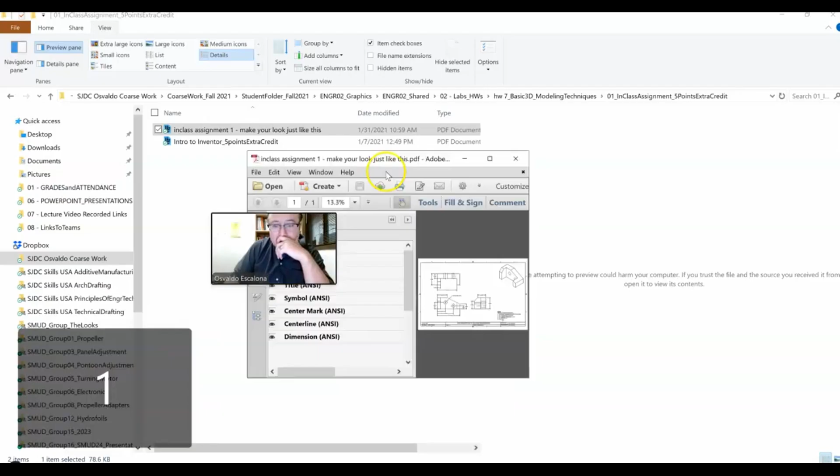So when you do it, try to make it look the same. I think the only difference is that you're going to have to put your own name. Besides that, try to make it look just like mine.

And again, if I mark it and you see that, and yours looks like that, then you have an excuse to tell me, Professor Escalona, you marked me for something that I did just like yours, and you shouldn't take away points from me. Most likely I will tell you it's fine, you got it.

This drawing is not perfect. It's actually made by Locke Jackson. It has a couple of mistakes. The first thing I notice here is that there is a little gap right there. Let me turn on my pointer, because I want to make sure you guys can see what I'm looking at.

Let's comment this. All right, so you'll notice there is a little space somewhere in there that shouldn't be there. That space should be here instead. This center line should be centered - there's a hole here, this represents a hidden line, which should be somewhere in the middle. It's a little bit offset.

Besides that, just make sure you put your name and the text is centered. And I think that's it.

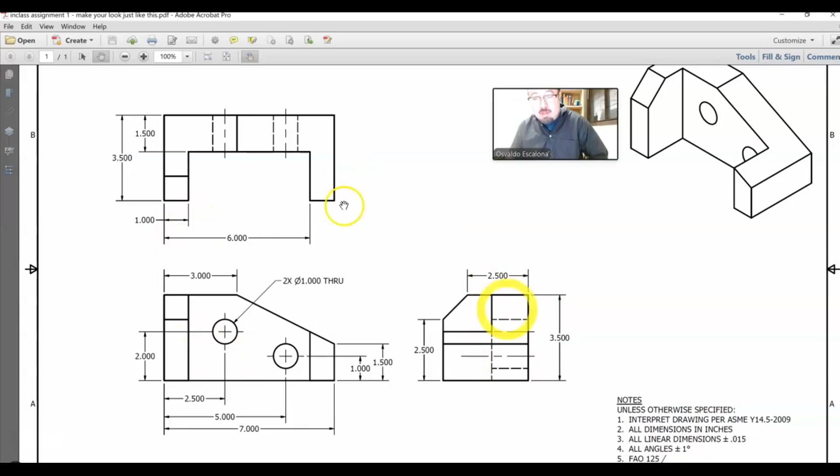Now, if you guys go and do it and it looks like this and I mark it, you can always argue, tell me, Professor Escalona, I made it like yours, and yours had whatever mistakes, I need my grades back. Now, if you don't make it like the one I'm giving you, then if I take away points, don't tell me why I didn't give you the 5 points, because you didn't make it like mine.

Especially at the beginning when you guys are learning, I want to give you as many examples as possible and have them correctly. Then you'll have homework number 7, which will also say make yours look just like mine. You need to make it like mine if you want full credit.

If you go to the lecture video recordings, you'll also notice that you have in-class 7 and homework 7. Again, the in-class 7 is extra credit, and the homework 7 is due on Monday.

Let's actually now talk about the new assignment, which is homework number 8. I have it open already. I'm going to bring up Inventor Professional, and let's talk about it. Let's actually read it together.

Use your own sketches and/or the dimensioned isometric views provided. Create a fully dimensioned A-size drawing. And you're like, okay, so what is an A-size drawing? A-size drawing is an 8.5 by 11, which I have a template for in my Dropbox, which we're going to use. 8.5 by 11.

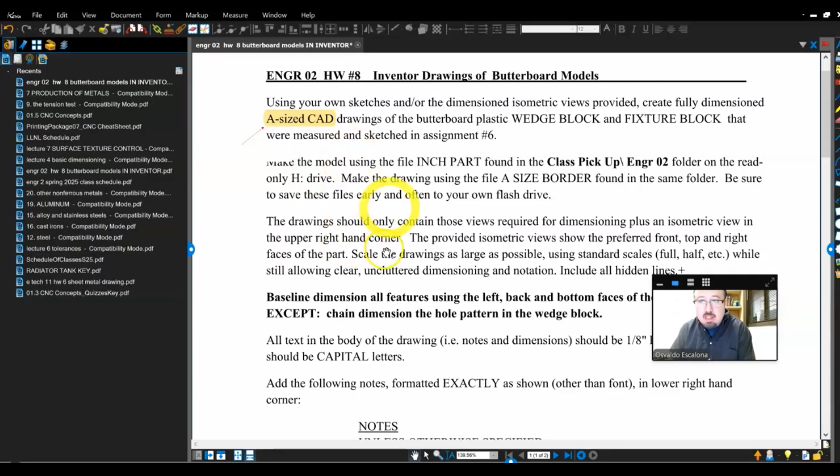The drawing of the butterboard plastic wedge block and fixture block that were measured and sketched in assignment number 6 - you guys are going to submit it tomorrow.

With correct dimensions. I'm going to do the models today. Make the model using the inch part found in the Class Pick Up engineering 2 folder. Okay, so this guy is not correct, right?

Because we're doing everything electronically, you guys will not find anything on the H drive. Everything is going to be in the Dropbox. If you go to your share folder, go to your homeworks, you guys recall there was the 00 border and model templates where you found your templates for CAD. Guess what? You also have the templates for Inventor.

So if you go inside, okay, this one's the metric one. Let's go back, we're doing inches. The US border and template, that is where you see the inch part, and that's where you see also the A size drawing.

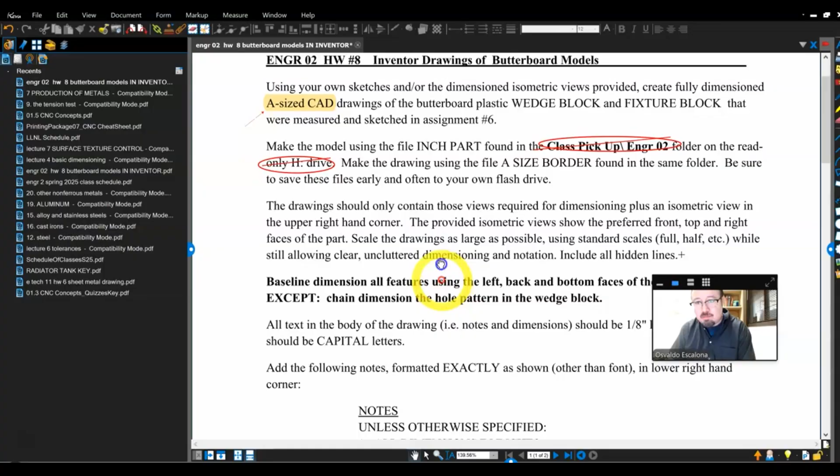Let's continue. Make the drawing using the file A size border found in the same folder. Make sure you save the files early and often to your flash drive. The drawing should only contain those views required for dimensioning plus an isometric view in the upper right hand corner.

The provided isometric views show the preferred front, top, and right faces of the part. Scale the drawings as large as possible using the standard scales like full, half, 3/4, and so on, while still allowing clear dimension and annotation, and notation include all hidden lines.

Baseline dimensions, all features using the left, the back, and the bottom faces. So datum, baseline.

Except chain dimension the hole pattern in the wedge block. Okay, so they want me to use a chain dimension for the wedge block.

All text in the body of the drawing should be 1/8 of an inch height, which is already included within the template, so you don't have to do anything. All text should be capital letters, yes, everywhere.

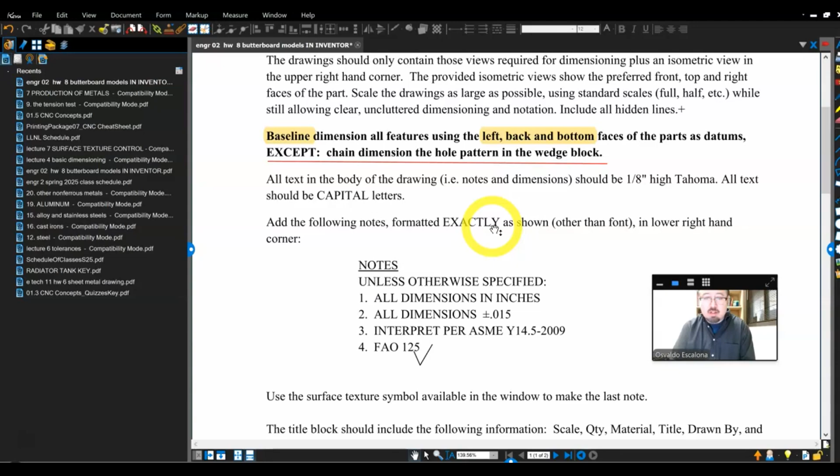Add the following notes, formatted exactly as shown in the lower right-hand corner. They want you to put the check mark, which is the surface symbol. And they also said that they want you to use the scale, the quantity, the material, the title, drawn by, and what part is required.

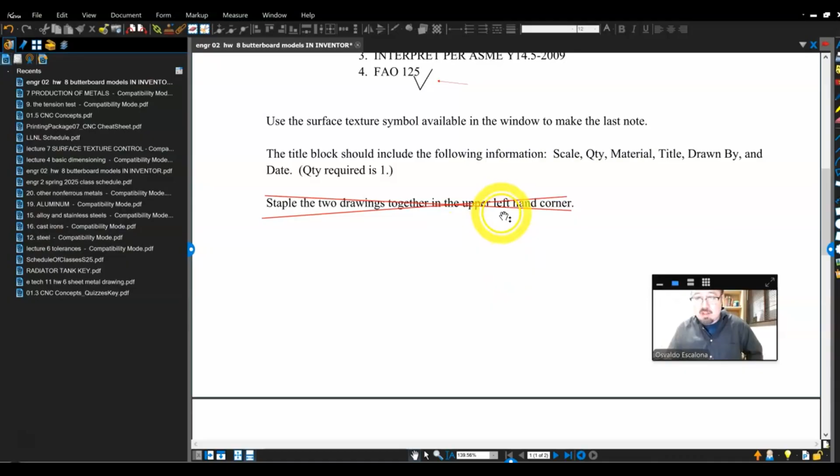Staple your drawings together in the upper left-hand corner. No, we are going to submit this online. I want to give you guys - everybody has different learning curves, so I want to give a chance to the people that need a little bit more time. That's why you guys are going to do it online, and I just want to give you guys enough time. Otherwise, you will have to submit this in person, and we'll be doing the same day. So I'm not trying to do that to you.

Okay, so let me, we're going to start with this one. Let me just register my mouse pointer focus right here. All right, give me a second, guys, and then we will start. I think it's good. All right, so Inventor should be open now.

It is right here. And again, the first thing that I want to do is I want to go get the files from Dropbox. Now, if you guys were to not install Dropbox, maybe you guys are - I believe I gave you guys a link in my drive.

Let me see, so I believe these links - don't quote me on this - I believe these links, if you go to my drive in the engineering lab, there is in my drive, it has one that says links. And you can grab this link for engineering 2 and post it in the drive.

Some of you guys have not installed Dropbox in your desktop or laptop, and when you do that, it's different working from the online version than working from the desktop. You guys will notice that I haven't installed my desktop, so I don't have to download anything. It's already there. But if you have not installed it, you have to do a little bit different. I'm just going to show you how to do it.

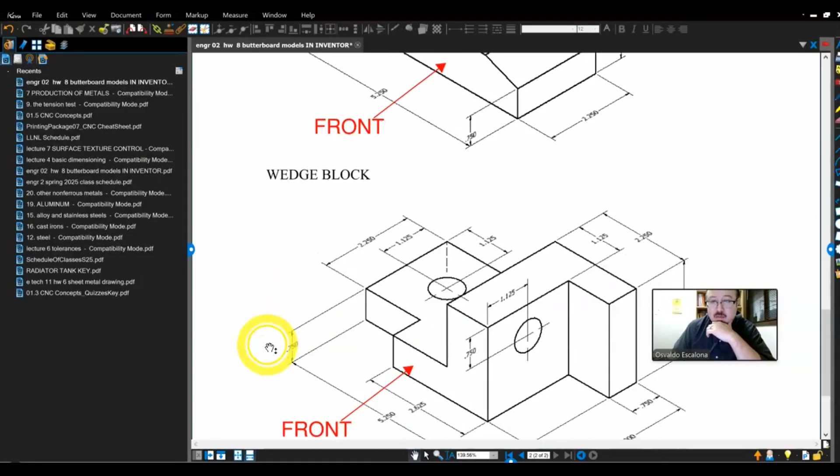As you remember, when you did your homework, you had two of them: the wedge block and the fixture block. So maybe, just maybe, I should have one model which is the fixture and one model that is the wedge block. So that's what I'm going to do.

I'm going to come over here and rename it wedge block part. Then I'm going to grab my drawing and rename it wedge block drawing, and that's going to be for the first one. And remember, I also have the fixture, so I'm going to select them and paste them. Control C for copy, Control V as in Victor for pasting.

So I'm going to call this guy fixture block, and I'm going to call the other one fixture drawing. What is that? Fixture block, fixture drawing, this should be part. I think I selected both when they got the same name, that should be the part. So just make sure you have a fixture block part, wedge block part, fixture block drawing, wedge block drawing, and you rename them before you even start, because otherwise it might lose the link between them, between the drawing and the part. So you want to rename them before you even open them.

So now that I have them, I'm going to open them. In fact, I'm going to open them from here. I'm going to say open. And you'll notice that it took me somewhere else.

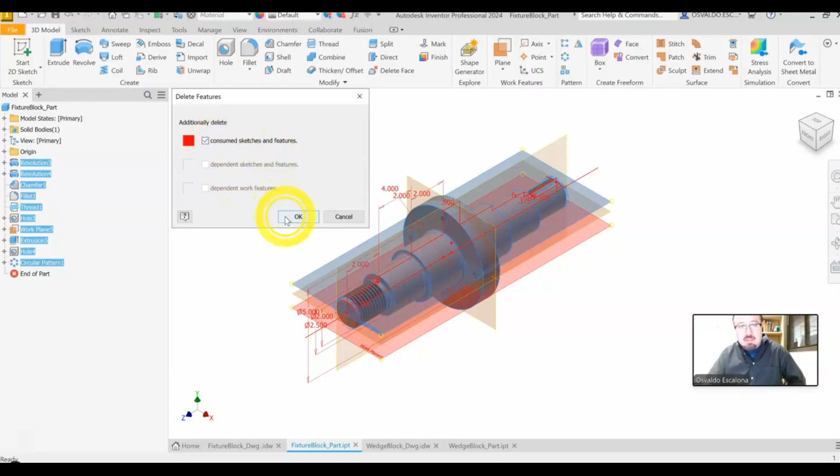It's asking you, delete everything, consume the sketches and features? Yes, delete everything, right? And save it because this is your template. Control S to save. I'm going to do the same thing: click the first one, shift, hold it, click the last one, right click, delete everything. Save it again because it's your template.

You'll notice that on my screen you have a yellow portion. I won't always be telling you, sometimes I might forget: red is the left button, the right click on the mouse is the blue button, and it will also point your menus. Usually left click is for selecting, right click is for menus. Inventor is really easy because everything is left click and right click.

The way Inventor works, especially on the easy models, is going to be subtractive modeling. I'm going to create a box. My box will look something like this. Boom, right? And then the same thing with your sketches, right? This guy says to me it's 5.25 by 2.25.

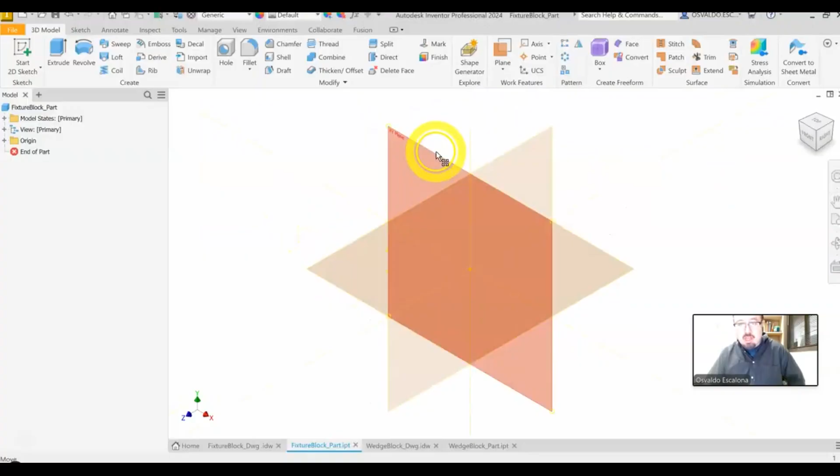Let's start. I want to select everything: left click, right click, new sketch. Then I'm going to go to the rectangle and choose the 2-point center rectangle. I'm going to hover until it becomes green, click on it once, and then click again somewhere outside.

You'll notice that my rectangle keeps on moving. It needs to be completely constrained. So I'm going to right click and give it a size. Right click, left click, I want to select the line. I click on it and type 5.25. Boom, it's going to grow accordingly by 5.25 and 2.25.

So I'm going to give it another dimension. Right click, dimension, and click 2.25. Boom, it has the size. I cannot move my block anymore. That's the whole idea: your sketches should be parametric and should be modeled correctly.

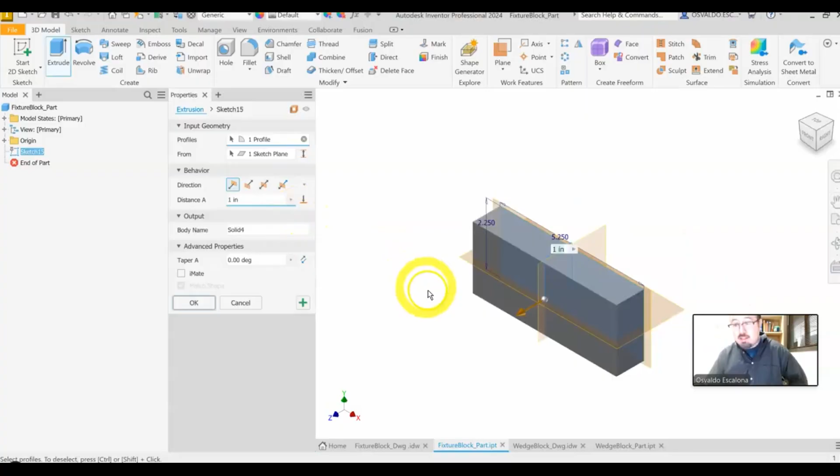So I'm going to finish my sketch, and then make it 3D. How do you make it 3D? By giving it the depth. My depth is 3 inches for my box. Right click, extrude. Inventor knows your most common commands, and extrusion is one of them.

So I'm going to go 2 ways, 2 directions, and I want it to go symmetrically. I can go one direction, I can go the opposite direction, I can go symmetrically, and I can also do asymmetrically with different distances in different directions. One extrudes this way, the other extrudes the other way. In my case, it was 3 inches. I'm going to click OK, and I want to do it symmetrically.

You can also give it a name to the solid. In my case, I'm not going to give it a name. As soon as I'm done, I will create a new folder, and that folder will be my solids folder. Now I'm going to start chopping the same way to show you how to dimension.

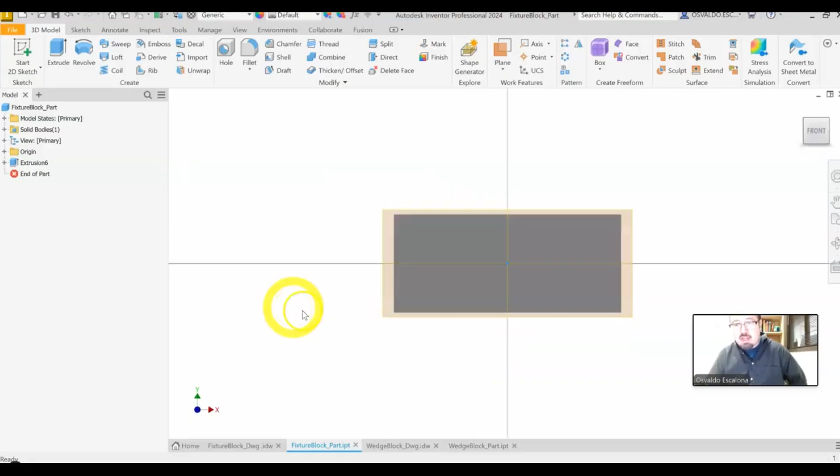I'm going to create on this face, and I'm going to create a new sketch. Remember, left click, right click, pretty much. I'm going to project a couple of lines, this edge and that edge. Then I'm going to right click and make a line. Left click, right click. Select on the line, select on the other line, right click, and say OK.

You'll notice that point is locked. But if for whatever reason, when you make the line, it did not lock, let's say you did something like this and it completely didn't lock. Once you did the projection, you can grab that dot and drag it till it snaps. And if it doesn't snap, continue dragging until it does. There is this command, the coincident constraint.

It allows you to put lines and points together. So if I click on it, I can click on the point and then click on the line. Boom, and then snap it. See, it doesn't come up anymore. If you want to delete something, select it and click the delete key on the keyboard.

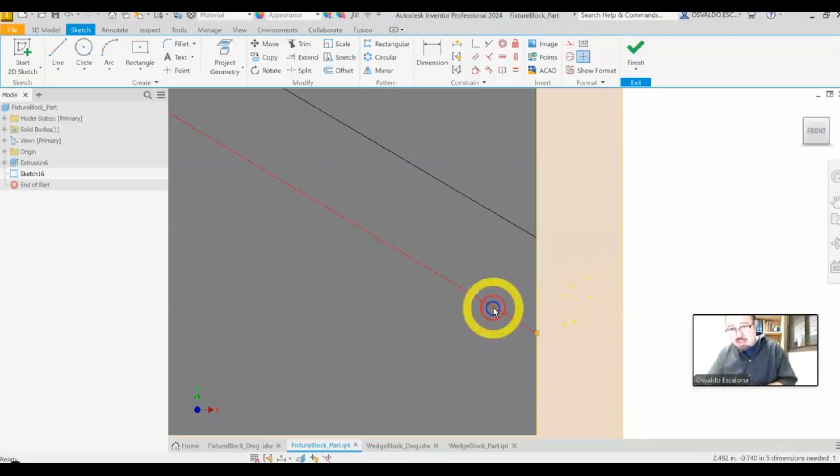What is the size of the cut? It's 1.5 by 0.75. I want to come over here, click on the left side, click on the point, and it's 1.5. Right click, dimension from the bottom to the point. Click 0.75. Boom, I have a closed profile because I did the projection of this line.

And in the projection of this line, I have a line, and a little triangle has been created. I can use it now to do my extrusion. Right click, extrude, select the triangle. I will want to create an extrusion in that direction, flip the side, and make sure that it is set to cut.

The first option creates the solid and joins it. The second cuts. The third creates the intersection between the solids, and creates a new solid. We're making a single part, so I don't need to create new solids, I just need to cut it. Boom.

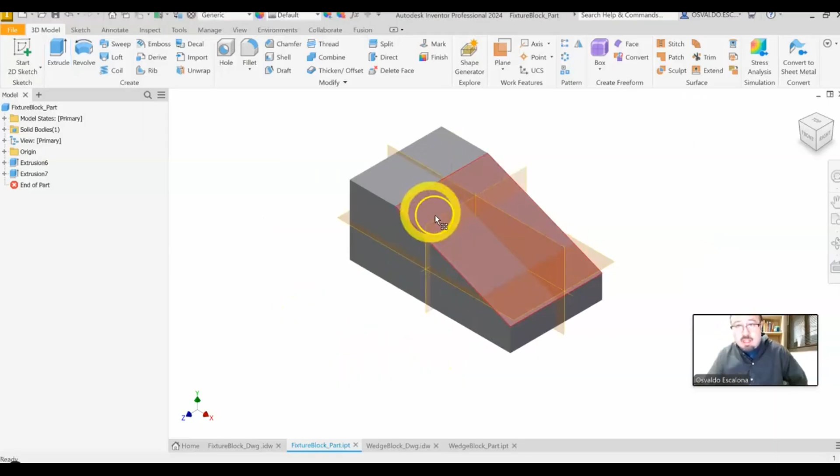I want to look at the things so you guys can see a little bit better. I can go to the View tab and set the display to shaded with edges, so you can see it slightly better.

Let's go back. Okay, so now I have another cut that I need to do. This is the cut that you guys need to do, right? So what I'm going to do is go to the side view and start doing a bunch of chops. Let's go to the side view, which is this way, right? So I'm going to select the face.

I'm going to right click and say new sketch. Left click, right click, left click, right click. So I'm going to do a rectangle. Left click, right click - so this is right click, by the way. Menus are right clicks. Click on it.

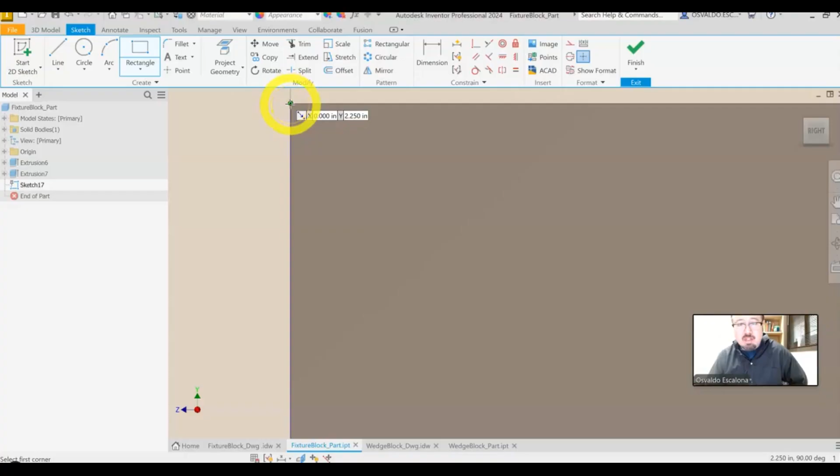Select the corner. Oh, I cannot get the corner. I see it right there. When it's on screen, it's ready. Click on it and then click somewhere outside. That's the first rectangle. Come over here, over till you see the dot, click on it, move away, and click again.

I got two notches that I gotta take care of. The first one is 1.5 and 1.125 from the bottom. So I'm gonna come over here, dimension, right click on this one, give it a 1.5, and the other is 1.125 from the bottom. Select the rectangle that we did, 1.125, boom, it's done.

I have another notch. This one is 0.75 and 0.75 from the top. So I'm gonna measure 0.75 on the side, and another 0.75 from the top - that's what it asks. 0.75, boom, boom, boom. 0.75, 0.75. I am done with both of the rectangles.

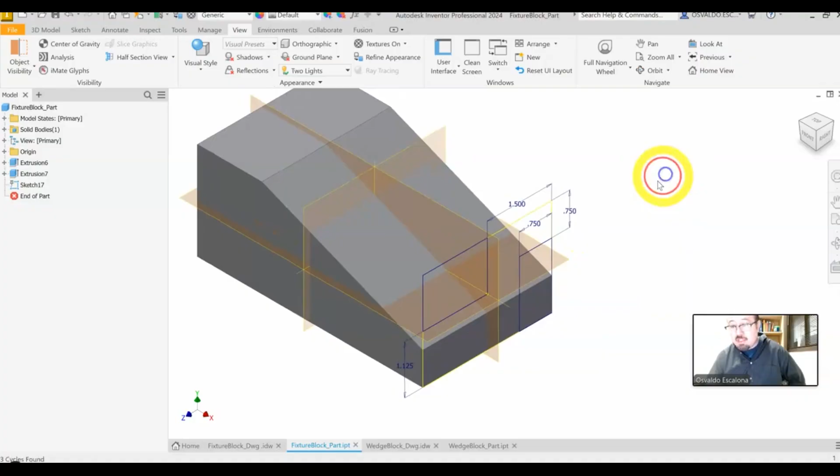I'm gonna finish my sketch. First rectangle in the front, second rectangle in the front. I'm gonna right click and do extrude. Select the inside of the rectangle, select the other inside of the rectangle.

I don't want it to add material, I want it to cut material, so I'm going to flip it. And I want it to go through the whole part. The first one has a distance, the second one gives it through all. The third one allows you to select a face to end, or something like a feature to end your extrusion. In my case, I'm just going to say through all. And my part is pretty much done.

I just need a couple of holes, hole 1, hole 2. The first one is 0.75 and 1.125. So how do you make a hole? Right click, hole, left click, right click, everything, right guys? Left click, right click, I'm going to click on the surface. Boom, created the hole and I need a 0.75, 1.125.

So I'm going to click on the edge to give it a distance and I'm going to type 0.75. I'm going to click on the other edge and I'm going to give it 1.125.

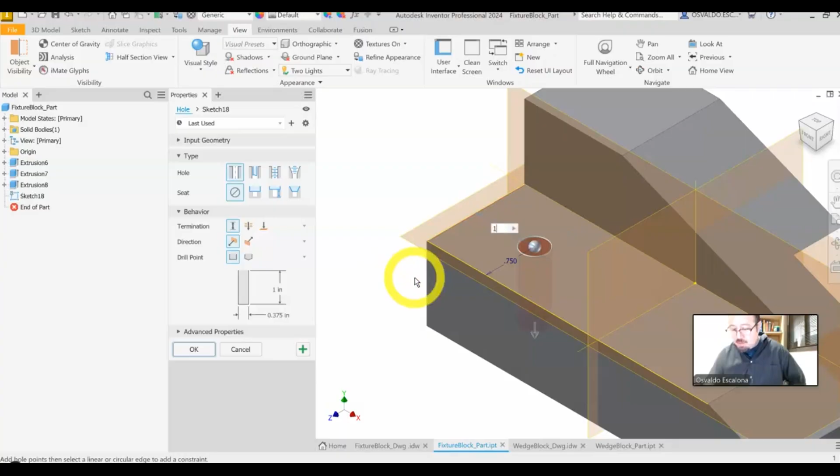Boom, I'm going to create another hole. I'm going to put it somewhere about here. And again, I'm going to give a distance from here, 0.75. From here, I'm going to go and find out what it is. So it's 1.125 plus 1.875. I'm going to type 1.125 plus 1.875. Boom, guess what?

Inventor can do math for you. Enter. What happened? I didn't look at the holes. What was the size? I need to edit the command.

Anytime that you want to edit the command, there's two ways of doing it. You double click on the command, it will open the command again, or you can click on it and then right click on it and then edit the feature.

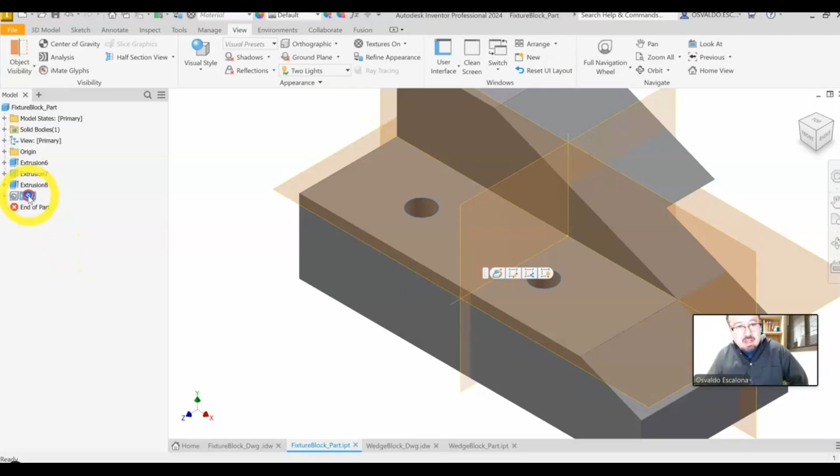When I created my hole, it actually created a sketch. You guys notice the sketch? The same way that we did with the extrusion, the hole command automatically does it for you. If for whatever reason you made a mistake, you don't have to repeat the whole thing. You can open the folder, click on the sketch, and change your dimensions.

Just click on it and give it a new dimension. I don't know, 1. Boom. It will move it. Control Z, as in zebra, to undo what you did. I needed to change the hole size, so I'm going to double click on the hole.

And the size of the hole is 3/4 of an inch. So I'm going to come over here and type 0.75. Boom, simple hole. There is no seat.

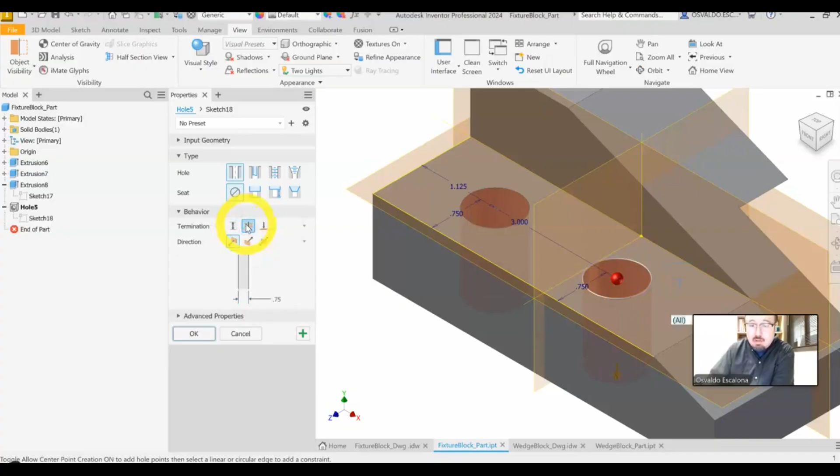I don't have any spotfaces, any counterbores, any countersinks. The termination is going to go through all. I want it to go through the whole thing. I can change the direction of the holes in case we need the right direction. I'm going to say OK.

At this point, if I want to get rid of my planes, I can go to view and object visibility, and turn off the work features. If I want to give it a nice color, I could come to the default colors. If I want to give it a material, I go to the generic material.

Let's make it out of particleboard. Let's say that this guy's ABS plastic. Boom! How do you do it?

Now it is time for me to do a drawing. When you make your models, they should be clean. Extrusion use, extrusion use, extrusion use. There should be no extra sketches all over the place. If you create sketches just like crazy, your functions and commands will not work. You will start looking for different things and you won't know what to do. Create a sketch, use it. Create a sketch, use it.

There is a command line. The command line tells you where the part started and how it was built. I can drag my command line and it will tell me how it was built. I created a cube, then I created a cut, then I created 2 cuts, and then finally created a hole. We'll dig more into the command line later on.

This is officially your first modeling video. Let's start placing this in the drawing.

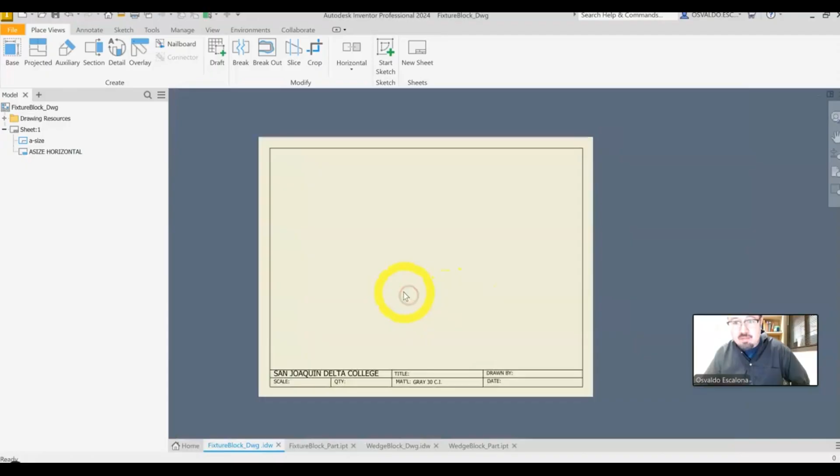All you have to do is click on the drawing. You guys should have it activated, and then once you place a view, it's just left click, right click, and base view. That's the front view. If you create it correctly, that is the side view, that is the top view, that is the isometric view.

Boom! Created the views for you. You don't have to do anything. You just gotta drag them and put them in the correct location. Seems to me that a half was pretty good, which I believe that's what we're gonna use.

I need to put a bunch of center marks, center lines. I'm gonna see if Inventor can do a couple of them for me. I'm gonna hover until I see the perimeter of the model. I'm gonna double click, it's gonna bring this. I don't want that. Actually, I'm just gonna click on it once, right click.

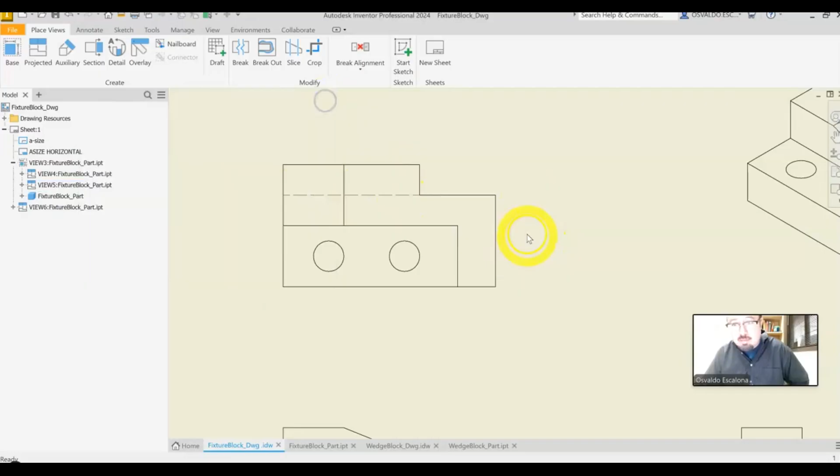There should be one that says automatic center lines. Click on it, activate it, and say okay. Boom, created your center lines.

If for whatever reason they did not create your center lines, there is always a way to do it. You can go to the Annotate tab. There is a center mark right there. Click on the hole, boom. This is a hole pattern.

I need to create a center line in between them. That's what this one comes about. I select the hole, I select the other hole, I right click and I say create. Boom. Let's try it again.

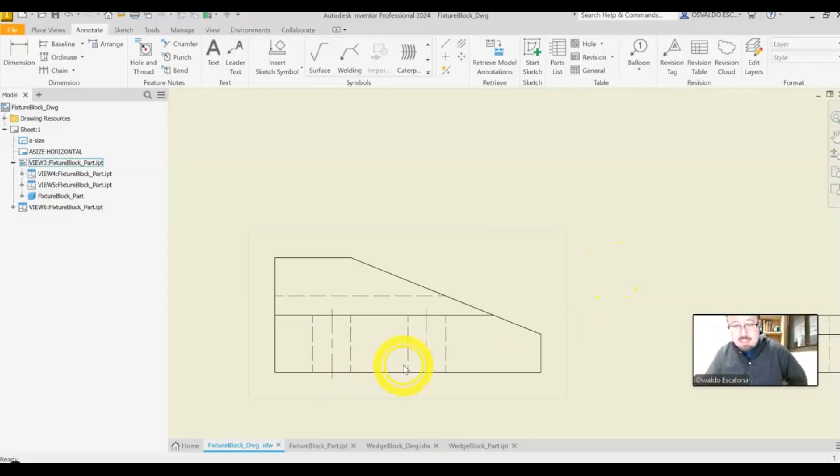I'm gonna click on my view. Right click, center line, automatic center lines. Click on that one too, and click OK. Boom. If for whatever reason it did not create a center line, delete. Let me delete that one. Select delete.

There is this one, it's called the center line bisector. It allows you to create a center line between lines. So I'm going to select this line, and then I'm going to select that line, and boom, that's it for you. Let's try one more time.

Left click, right click, automatic center lines. Click on that guy, and boom, done.

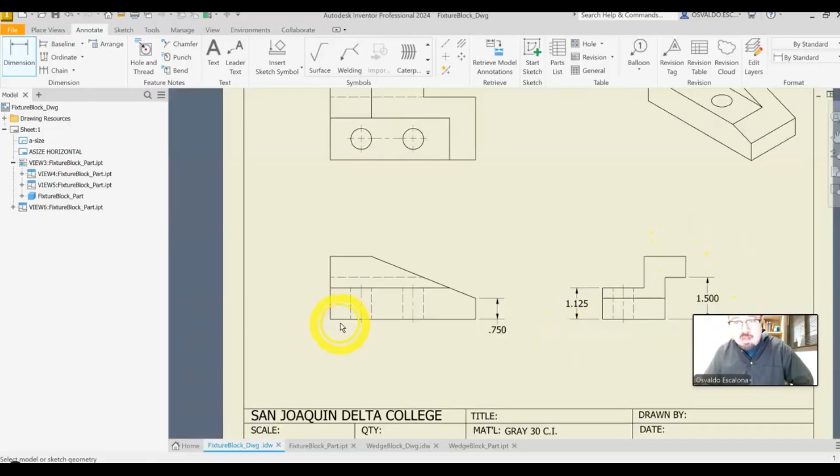Now you guys gotta put your dimensions. How do you put dimensions? You right click, dimension, from here to there, boom, from here to there, boom, from here to there, boom, overall height from here to there, boom.

When you create a vertical dimension, if it doesn't fit, there should be a little shoulder. So click on the dimension, select it, hold on it, and then drag it. There should be a little shoulder if it did not fit.

The left, that's the bottom datum. The left datum, left click, right click, or right click, left click in this case. Because I right click for the menu, left click to select it. I'm gonna do the holes.

Again, one of my features from here to there. Boom. They told me make a chain dimension between the holes. This is a chain dimension. They need to be chained with each other.

Keep in mind that I'm giving them a space in between my part and my dimensions. Should be within about 3/8 of an inch. You don't need to measure it. Just make sure that your spacing is not too close to the part.

I'm gonna go from here to there. Boom. The next one, this one, I don't need it. I never went over here to from the back and figured this out. I just did the angle, went to the side, boom, created my 2 notches, and this guy was derived from it.

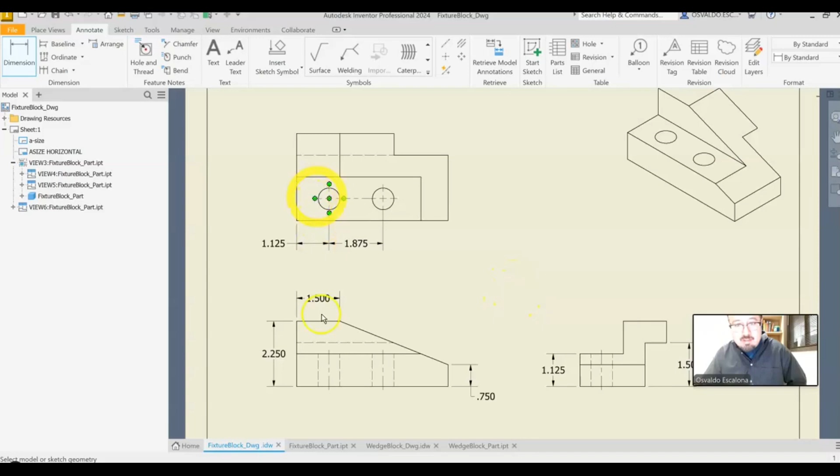I never had to actually dimension this line. So I got the first feature, second feature, the next hole, and it seems to be the last thing is just the size of the part. I'm gonna put it right here. Boom. That is the left datum.

I'm gonna go to the right datum. I mean the back of the part, which is this is the back, and that one is back. So in my case, I could have preferably come over here and do it here. Oops, not there. Right click dimension. Preferably do it here because that's what I did the notch, right? But unluckily, things are crossing each other.

So instead of doing that, I'm gonna put it on the other view. Again, preferably it should be here, but I don't like to cross things. So I'm gonna go put it over here. That way I don't have to cross them, which is the same feature, right?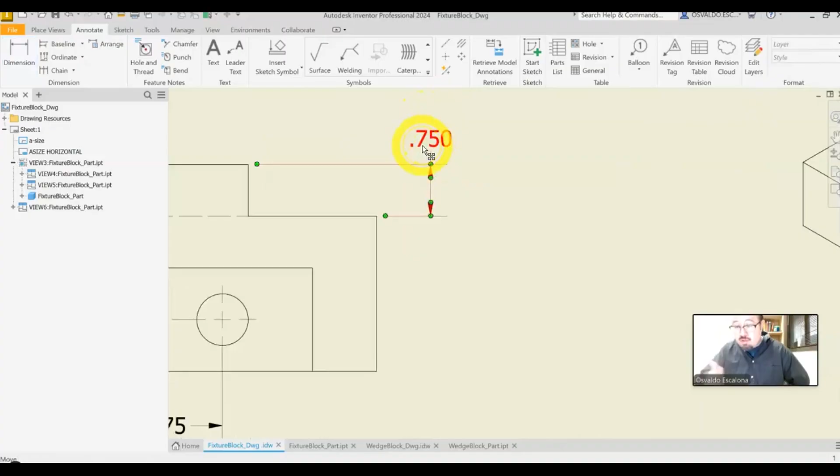Remember, if your part get out and you're doing a dimension that is sideways, your dimension is going to look like that. You always need to have a little shoulder. Boom. Okay, so that is that one.

The next thing is this one. That'll make sure it aligns next to the other guy, right? Kind of similar to alignment. And then, so I did this one, I did that one.

The last thing will be overall width. I'm not going to do it here because it's going to cross this dimension. I'm going to do it over here. Oh, I also got a hole. The hole right there. And then I got the dimension from the whole part.

So let's worry about that. Boom. I also have a hole right there. Keep in mind that there is no spacing here.

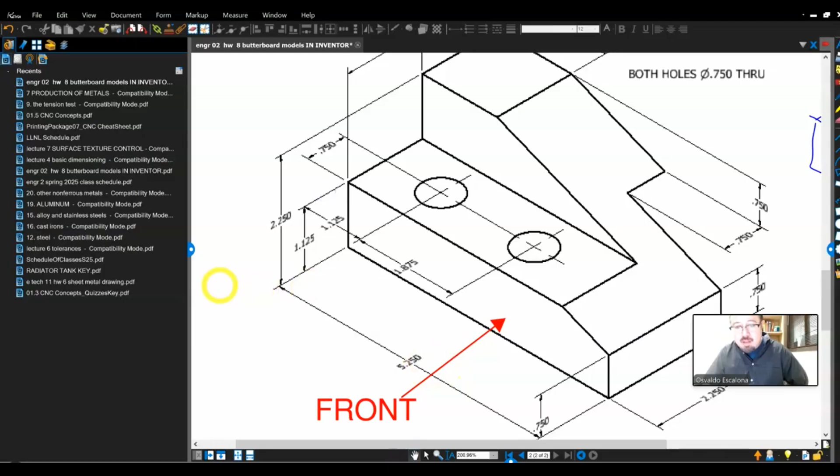We need to call out the holes, and there's a nice command called hole and thread note. It calls out the hole for you. All you have to do is select it, click on the hole, move away, and boom, it will do it for you, and give it a diameter symbol.

All you have to know now is on the front of the part, and we've got two holes. So I'm gonna say with an uppercase letter, 2X. I'm gonna say okay, boom, done. Literally, I think we're done with this part.

The next thing you guys want to do is put your name, you gotta put the title block, the name. You also need some notes. How do you create notes? This is the note maker.

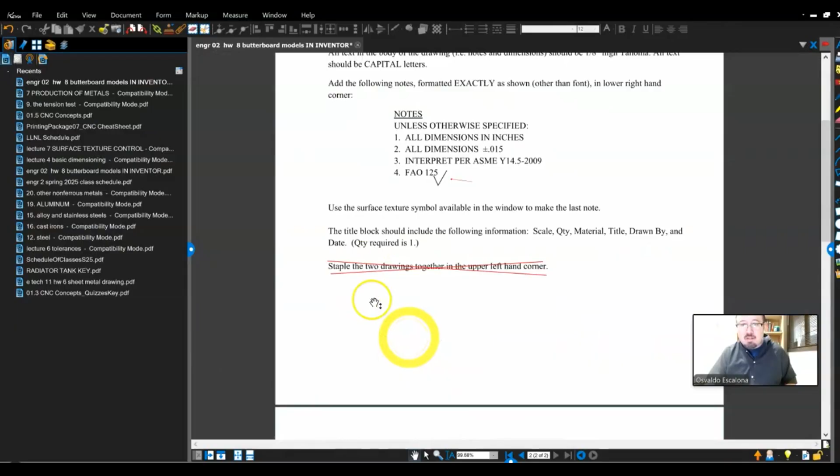I'm gonna put a big old note like this. It will take it to the editor. In my case, I remember I saw the notes somewhere, here, I saw the notes. Let's see if I can select them, select text, see if I can do it that way so I don't have to type it. I'm gonna select it, I'm gonna put it, boom. In you guys' case, you're gonna have to type it, right?

But if you want to put symbols, the symbols are where they are, these are the symbols. You select the symbols, plus and minus. If you want a degree, that's the degree, the countersink, spot face, and so forth. Okay, unluckily, we don't have a surface finish symbol. There is no surface finish symbol anywhere, right?

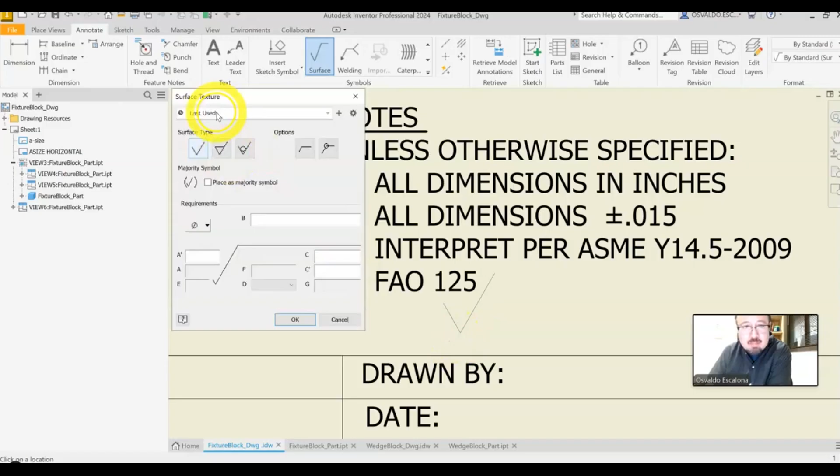So the way you do the surface finish symbol, until we go and underline this, right? The way you do it, remove my views slightly, it's a little out of the way. You go to the annotate tab, there is symbols, click on it, and then click again, double click real quick, it'll open this menu and you just say okay, escape. You'll also do a couple of texts for your title block, and boom, this part is done.

You need to create a PDF when you're done, so that I can grade it. To create a PDF, you go to the top, there should be a file. You click on the file, then go to export, and click on PDF export. Click on it, boom, it will ask where you want to save it, so you click on save, click OK, and it will generate the PDF.

You can now take a look at it. Let me see, it is here, it's the PDF. So in this case, I'm done with the fixture block. We just did it, right? That's what you're going to submit after you save it, and after you put the information on the title block, with a bunch of text notes. Boom, that's pretty much it, guys.

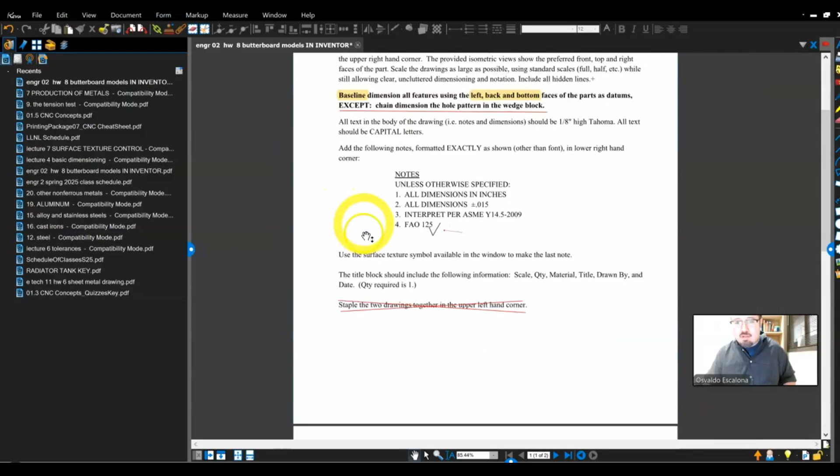You're going to do the same concept for your other part. What's your other part? I did this one, you guys get to do this one, right? Homework number 7, let's take a look at homework number 7. We have a couple of minutes, good enough for homework purposes.

Homework number 7. Remember, Autodesk Inventor is really friendly, so friendly that it allows you to do everything with left click and right click. Okay, so this is your part, right? So again, if you guys were to do this, most likely you will start the same way. You start with a rectangle, or not a rectangle, a cube, not a cube, but like a rectangular prism.

You guys will make a triangle, right? The same way that I did it, cut the notch, then make another square right here on the bottom rectangle, and then make two profiles with extrusion, boom. That will take care of this and take care of that. Then go to the right side view, make another rectangle, and boom, cut it, right? That will create all these notches.

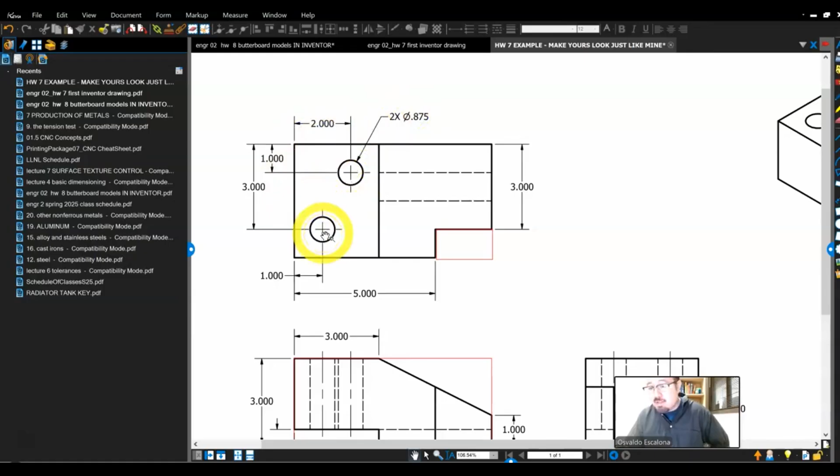And it seems to me I have one more notch on the top, so I will go to the top view, create a sketch, another rectangle over here, right? And boom, cut it. And then eventually you guys want to make two holes, right? So you right click, use the hole command, locate it using the edges, then use the appropriate size of the hole. And you are done with this one.

And then just go place it on the drawing, right click, place, click, click, click to place the views, and add the dimension, right click dimension, boom, it's done. And don't forget to use the hole command so it actually calls it out properly. This guy should say 'through'.

There's a lot of mistakes. Sometimes I find mistakes myself. Maybe I should do my own keys. But you guys will notice a couple of things though.

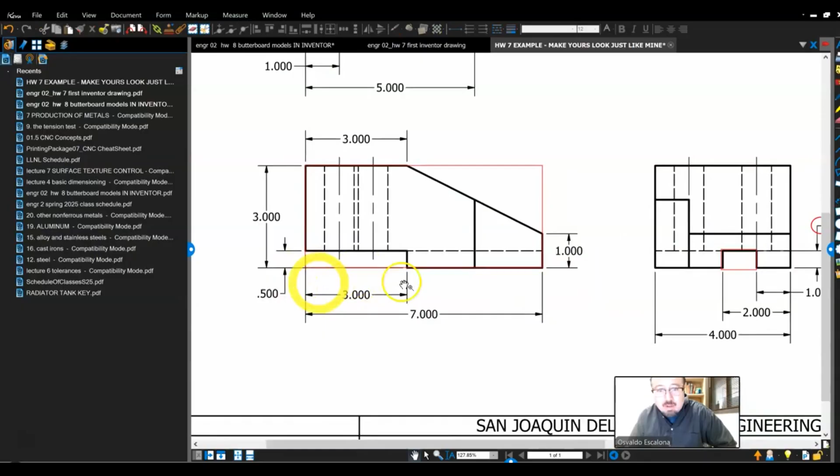There is a shoulder, about 1/8 of an inch. There are center lines. Your dimensions are not too close to the part. Good enough for government purposes. I think the only one that I don't like is this, which is I should say through.

And again, they shouldn't be. Actually, this one is fine because it has a gap in here. So the whole idea is when you go and you measure a hole, you're trying to look for the bullseye. So there should be only one gap.

Don't go and put the center mark and then dimension to the center mark, because then you will have 1 gap, 2 gaps. You are dimensioning to the hole. And again, that's the way I want you guys to do it.

Don't forget to add 'through' on the part, on the hole callout. Okay, I believe that should be good. You guys should be able to do your homework number 7. Again, your in-class number 7 is extra credit in case you guys want to do it.

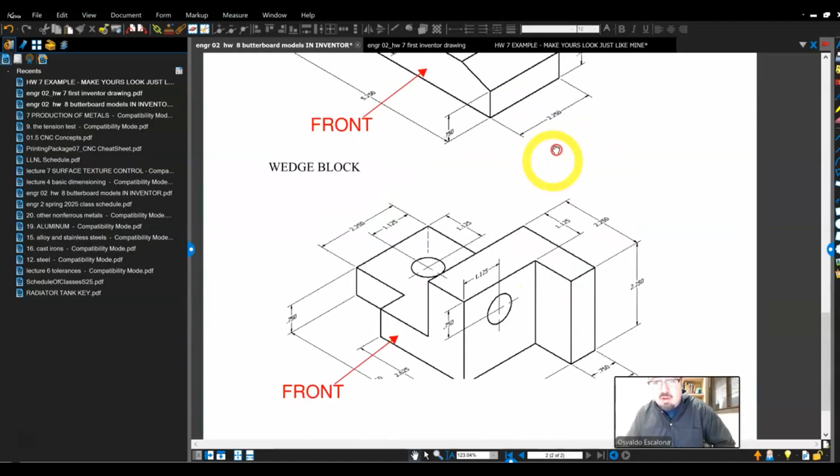Your homework number 8, I did the first part. And for homework number 8, you have a wedge block and a friction block, right? So I did one of them, you guys gotta do the other one. I think that's pretty good.

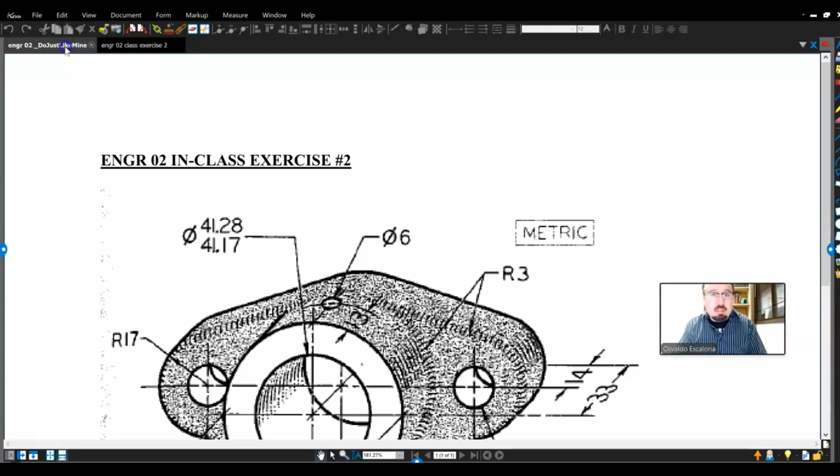So I'm gonna go look at your 'do just like mine,' which seems to me is this one. And this seems to me is your in-class, and the other one is the instructions. You guys will notice that this one is a metric drawing. And this is a metric drawing, so I am going to need a different type of template.

Also, I need to bring my pointer. In case I go a little bit too fast, you guys are able to see my clicks, left click, right click, blue and red. And I also need to have a register. I don't think I have a register, so let me go find it, where I have my registration number.

You know, today was one of those days. I woke up late, and I usually go for a run. If I don't go for a run, I don't feel well. So that's why I started the class kind of late. I usually start pretty early.

Okay, I think it's registered. Let's start. I need to ensure that I have my project activated. If you guys recall, last time I created a project called Engineering 2. At that point in time, I will go and start finding things in the folder that I asked it, where I have all my stuff.

Okay, so I created my homework number 9. I need to give it a template. I'm gonna go to the borders and model templates. You guys should have this in your homeworks, your first folder in your homeworks, 00.

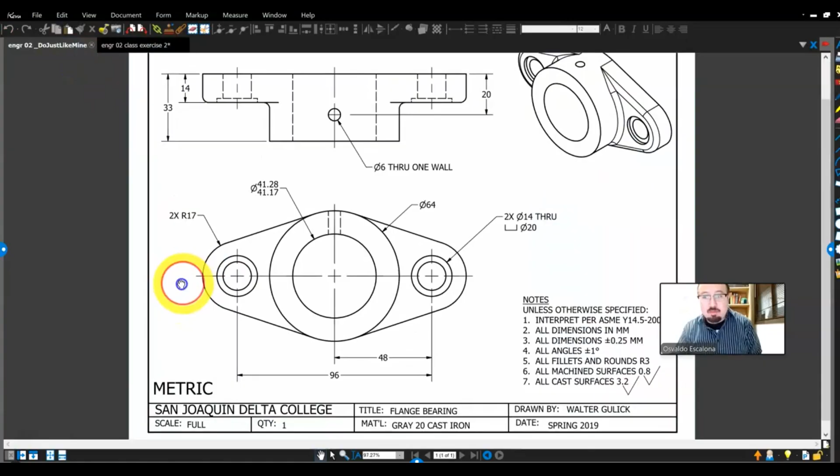I'm gonna go into the metric part, and I'm gonna copy. I want to see what size it is. By the way, you can tell what size it is without even knowing the size. This is an 8.5 by 11. How do I know? Because it has no numbers. If I were to have a B size, which is an 11 by 17, I would have a B somewhere here. But this one doesn't have anything, so I know it's an 8.5 by 11.

So when I create my folders, I need to copy the A size and the millimeter parts. I'm going to put it over here, paste, and then I am going to rename it. This is going to be in class 09, and this is going to be my drawing. I'm going to do one more. Right click, rename - this one is going to be my part.

Alright, so I think I'm good to go. Let's open both of them. I'm going to go here, open it. It's going to take me to the right folder because I activated my project. I'm going to select in class number 9 and homework number 9, and boom, open it.

Alright, let me get some more water. In class 9, homework 9.

Okay, so before we start, let's take a look at it. How would I model this? It seems to me that I have a cylindrical feature, and then it has like an ear, like a flange coming out of it. So my thinking is I'm gonna do a circular sketch and extrude it, and then I'm gonna also do this flange, extrude it, and then mirror it. That's most likely gonna be my approach.

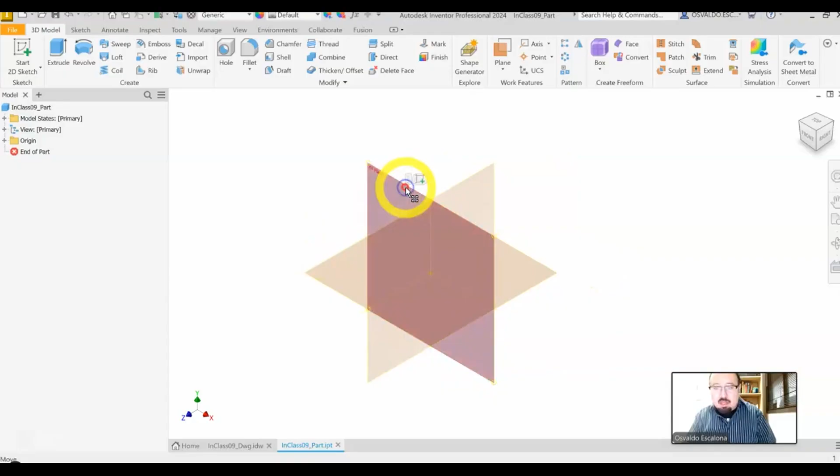So I'm gonna go to this plane, left click, right click, and then create a new sketch. Right click and create a circle. Left click, left click, right. Remember, if you guys see a red, it's because it's a left click, and if you see a blue, it's because I did a right click, in case I forget to tell you guys.

I go too fast. This one is 64 millimeters. I'm gonna come over here, right click, dimension, left click again, 64 millimeters.

Might as well also do one of these flanges, and it seems to me that this one has a radius of 17.

So somewhere over here, I am going to do another circle. I'm going to right click and do the dimension, select it. I dimensioned diameter, so I'm going to delete it. I'm going to select the dimension, and as I'm doing the diameter, I'm going to right click, and there should be a dimension type radius. Boom. Then I'm going to select 17 for my radius, and say OK. Alright, you guys will notice that this guy flies all over the place.

I need to lock it in place. So here I have a bunch of constraints, and what I want to make sure is that this point and that point are horizontal with each other. The horizontal constraint puts 2 points in an imaginary horizontal line, or makes a line horizontal. In my case, I'm going to make those 2 points horizontal with each other. Boom. Now you guys will notice I cannot move it up, but I can move it side to side.

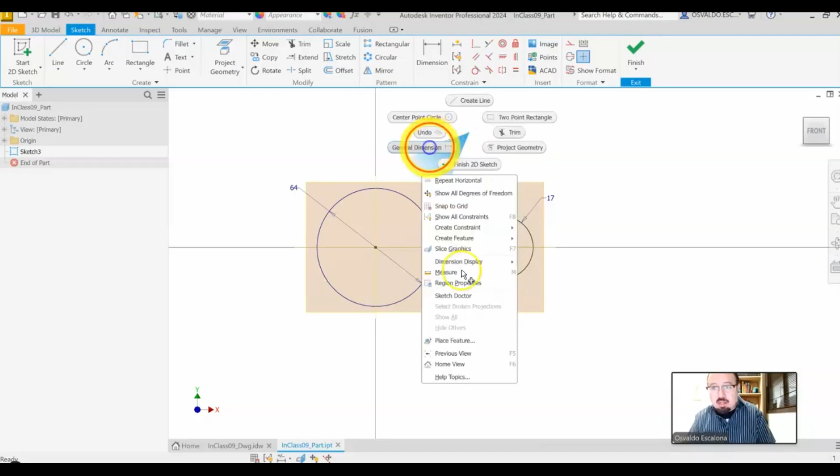Okay, so the distance between them is 48 millimeters. I'm going to right click dimension, select this one, and type 48 millimeters. It seems to me also that I have a line that is tangential between both of the circles.

So I'm going to go and make a line, and I'm just going to put it, not in the locks, maybe somewhere there. If it locks, you guys will notice that we'll want to snap.

So I don't want to snap to anything. Something like this. It's harder when you have a constraint and you want to get rid of it. Better make sure that you don't lock with anything.

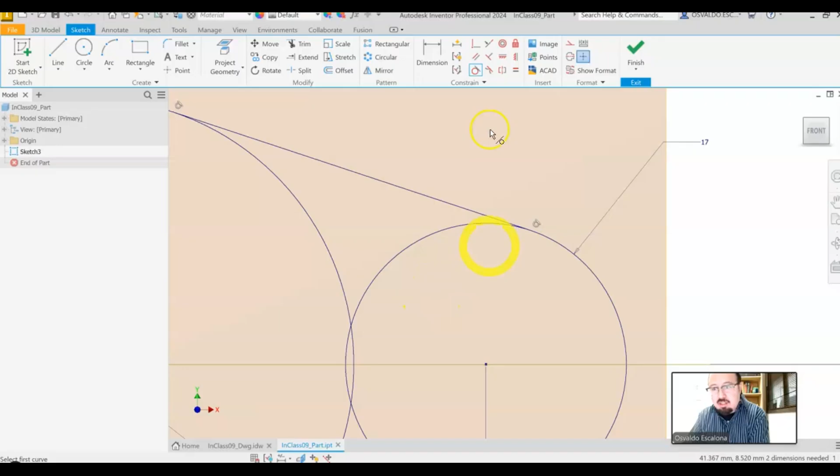Now I'm going to use the tangential constraint to put things tangent with each other. So something that is round or something that is straight, I will put it tangential. Click and click, click and click. Beautiful, I believe I'm done with this sketch. I don't need anything else. You guys will notice, simple, 3 dimensions, done.

All right, the next thing that I want to do is this flange. Take it out, and it seems to me the size of the flange is 33 millimeters. So I'm going to right click and do extrude. I want to select the profiles. You guys will notice it has a bunch of profiles, you want to select the one that you want. I'm also going to select this little piece in the middle, that one. I'm going to give it 33 millimeters, I'm going to put 33 here, and leave it like this. I think it's fine coming out this direction. I'm going to say okay.

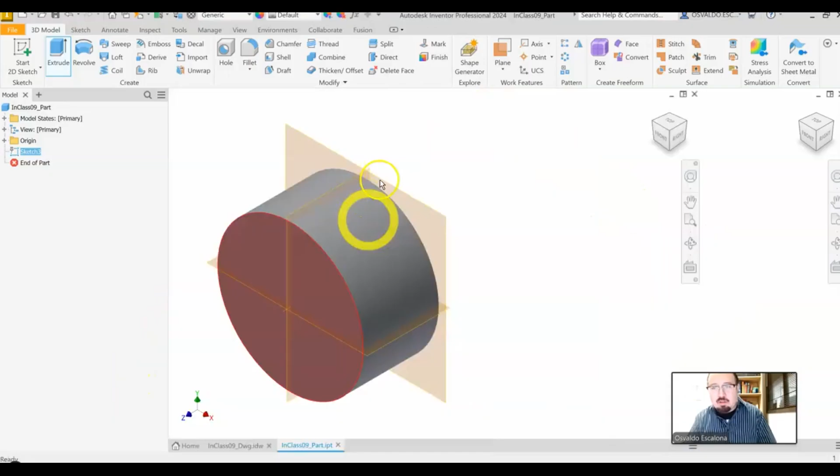All right, I want to reuse this sketch. As soon as I created my sketch and consumed it, it's part of this extrusion. If I open the plus, you will notice that I have the sketch, and I can always double click and it will take me back to sketch mode. What I want to do is make it visible because I want to reuse it again. So I'm going to left click, right click, and I have 2 options: I can make it visible, that will work, or I can share the sketch, which also will make it visible. In my case, I'm just going to click visibility, I can do either, it will be the same.

At this point, I'm going to do the rest of it. I'm going to do the flange, and it seems to me the thickness is 14 millimeters. So I'm going to right click, do extrude, select that flange, this flange, that flange, and I only want to make it 14 millimeters, like this one. I'm going to say okay, that's all I want to do.

Shift, middle mouse button in your mouse will allow you to rotate, and I need to make a hole now in here. So my hole, it seems to me, it is 41.17, 41.28.

I would suggest, if you guys were to have numbers like these, kind of weird ones, go somewhere in the middle. If you were to manufacture this, sometimes people use your models as a way to create the NC code, sometimes called G code, to run the CNC machines. But if that is not the case, I would suggest, for modeling purposes, the easy way is to choose one of those limits. In my case, I'm going to choose the bottom limit, and we don't have to do any math, but you can do the math if you want.

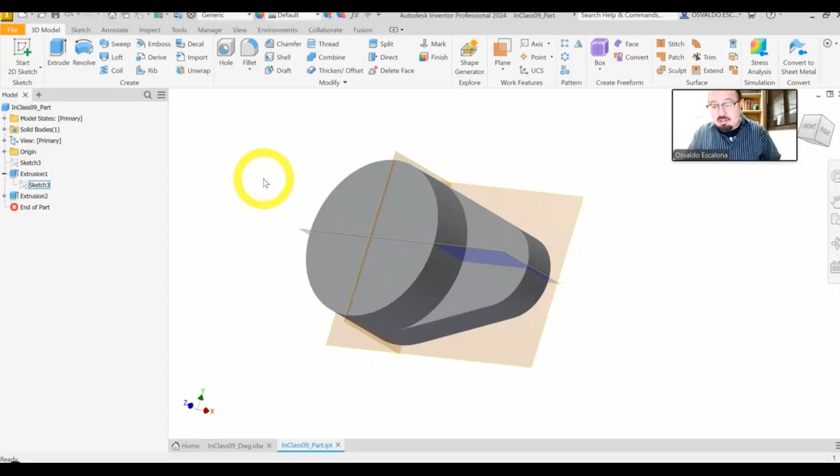So in my case, I'm going to do the hole. I am going to click the center, if it allows me to click the center. Okay, you guys see it doesn't let me click the center. Why? Because I have the other sketch that I haven't turned off the visibility. So I'm going to right click and turn off visibility so I can see it, because if you use the hole command, it's looking for a point, and if you have a sketch, it will not allow you to do the hole command. So I'm going to right click again and use the hole command, now it should let me.

I'm going to click on the surface. I'm going to click on the edge that is round to center it. And then I'm going to type the size that has no seat, it is a simple hole and it has all the way through. And the size, I believe, was 41.17. Double check, 41.17. I'm going to say okay.

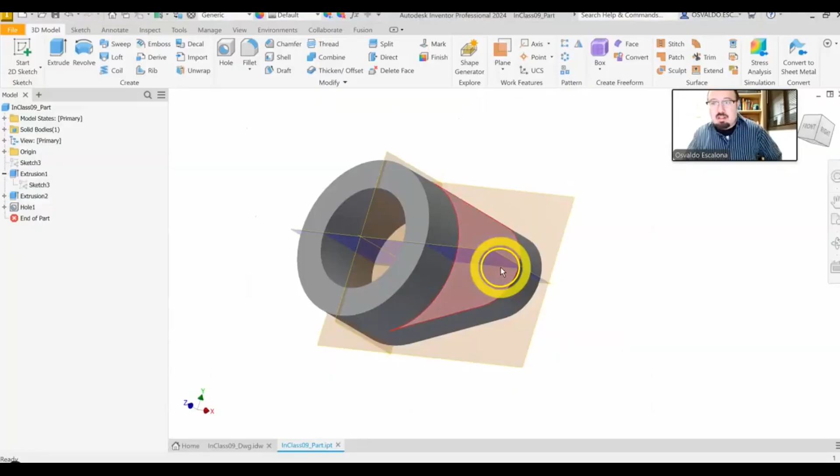The next thing that I want to do, I have a hole that is a counterbore hole. We talked about counterbores before. It has a hole that is 14 millimeters that goes all the way through, and this one doesn't have a depth, which means it's not a counterbore, it's actually a spot face that is 20 millimeters diameter. So 14 and 20, that means I'm going to use another hole.

I am going to put it in the surface, select the edge, and this time I have a seat. And if you guys remember that seat, it is 1/16, no, millimeters.

Probably should do a conversion for inches to millimeters. I want to see what it is first and then I'll round it up. So I got 14 and 20. I'm going to hit 14, so 14 for the bottom and 20 for the top. Then I'm going to say okay, and check what is actually the size.

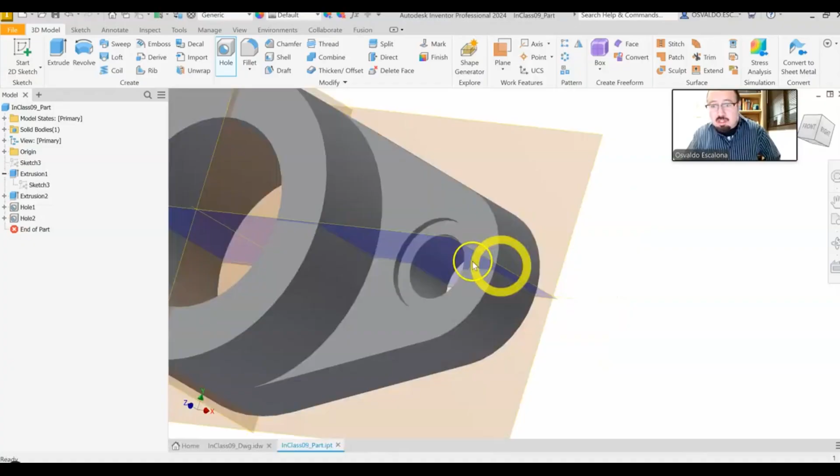Let me change the visual style so you guys can see a slightly better shading. So type M for measure, and then you select two things that you want to measure. I want to select the distance between this face and this face, and it will tell me that is 1.58 millimeters. Let's round that up to 2 millimeters.

I'm going to go back to the hole and double click really quick. As soon as I do that, it will bring me back over here and I'm going to change the number to 2 to use 2 millimeters. Boom, done.

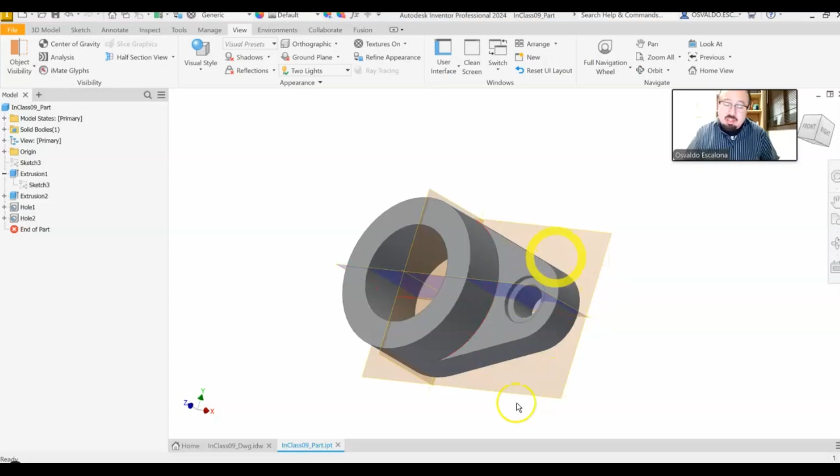The next thing I want to do is mirror this to the other side. But before I do that, I also want to do the fillets. So the fillets for this is 3 millimeters. I'm going to come over here, select it, and it will have the fillet and also the chamfer option. I want to use the fillet. I'm going to choose 3 millimeters, and also choose on this edge to get the whole fillet mine as well. I'm going to say okay.

All right, I also want to mirror this left side and put it on the opposite side. The way I do it, if you go back to the 3D model and right click, I don't have it — it's not part of my common commands. To find the mirror, there will be a tab: go to the 3D model, the pattern tab, right there they should have the mirror command.

I'm going to select it, and at this point I'm telling the features that I want to mirror. You can select it from the model tree. I can select that fillet, I can select that hole, and I can select that extrusion. You select what you want.

Then it's asking me, what is the mirror plane? So I want to select the mirror plane. I'm going to come over here, select the mirror plane, and it will give me a preview. Then I'm going to say okay. Done. We're pretty much done with this part.

Just clip it. Let's go back and make sure we got everything. Oh, there's one more hole on the top, and that one is going to be for a set screw.

Go and save this, so let's save it. It's going to be right here on the top, and the way you do it is you create a plane so you can sketch on top of it. If you right click, you guys will notice that I have the work plane option, and there are many ways of creating planes.

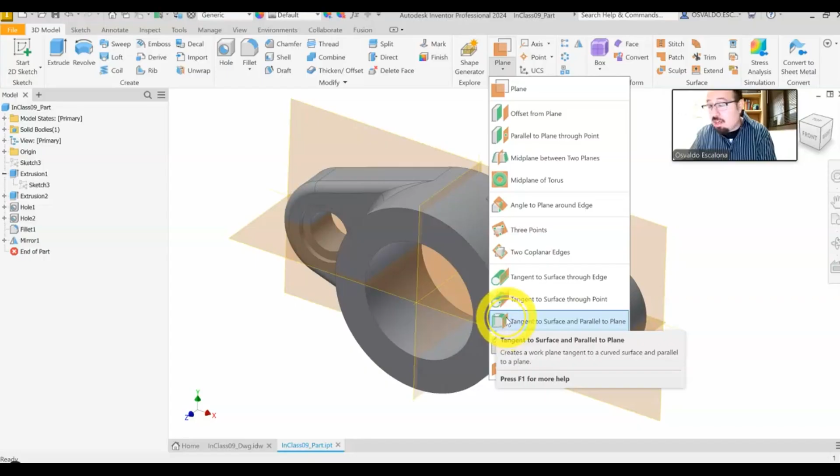For example, the one that I want is something tangential. Tangential — sometimes it doesn't really make sense, but this one is kind of like tangential, right? You'll notice it looks for a surface and then looks for a tangent face, and it will create a plane tangential to it. So I'm going to right click, do a plane, select this face, and make a plane tangential to that — choosing a face that is tangential. Right there, boom, now I created a plane.

At this point I can sketch. So I'm going to right click and create a new sketch. And all I need is a point, because that's what the hole command asks for.

So this is where the point is. I'm going to select it and put it right there. And now at this point in time, I need to lock it. So how am I going to lock it?

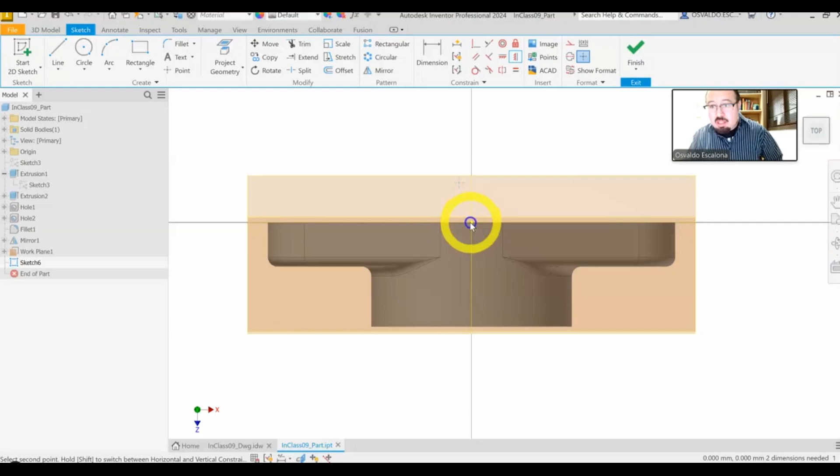I want to use my constraints. I'm going to use that point and make it vertical with that point, using an imaginary vertical line. So I'm going to select it, then select that one. Boom, and now it moves right there.

I want to push it down, and then I'm going to give it a dimension. The dimension from the back, it seems to me, is 20 millimeters. So we're going to right click, dimension, click, click, click, 20 millimeters. And then at this point in time, I can finish the sketch.

By the way, I have a bunch of stuff on the back. I might want to go back to my sketch and make it a construction line, because remember, the hole command is really picky, and the only thing it wants to see is points. I might get confused with these lines, so I'm going to turn them.

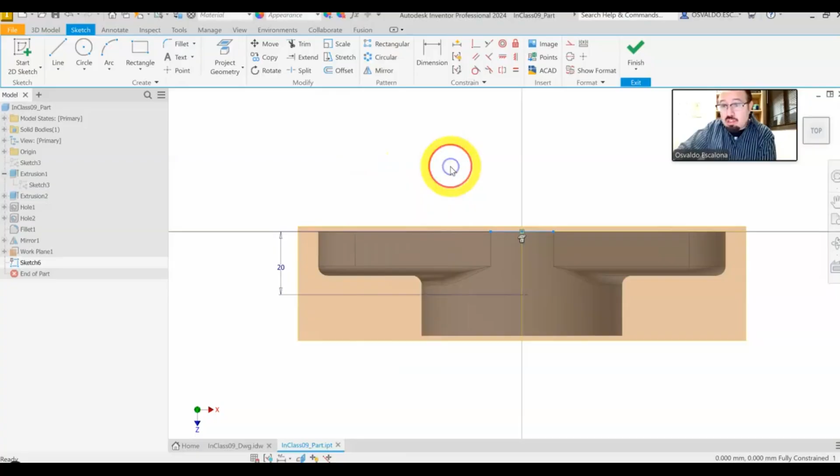I'm going to turn it into construction. I'll select it, create a window from left to right, do a right click, and turn it into construction lines. That way my hole command doesn't get confused.

When I right click, I'm going to create a hole, and it usually remembers the previous hole that was made. In my case, it used a 6 millimeter hole through one wall only, so no seats, right? It's just through.

At this point in time, I have the distance option, all the way through, and the other one is to go to a certain face and stop right there. So I'm going to click on that one, then go inside and click on that face, so the hole stops on the face.

Then I'm going to give it the size. You can give it a seat, but in my case, I want to give it this seat. You can give it any seat if you want - 6 millimeters. I'm going to come over here, put 6 millimeters, and then say okay, boom.

Now, if you guys want to look at it, I created the hole only on one of the walls. Let's Control S, and let's turn off the planes.

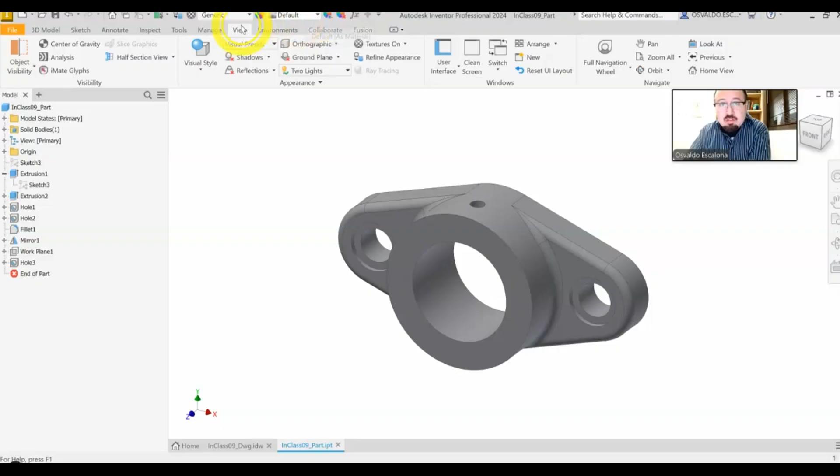And let's take a look at the material. The material for this is cast iron, gray 20 cast iron. So this is the material, and this one is the colors. I want to go to the material, and here I've got cast iron. Boom, there we go. We are done. Now it has the right material, and it's ready for me to place on the drawing.

I'm going to go back, save it, go to the in-class drawing, and then left click, right click, and base view. I'm going to put the front view, the top view, the isometric view. Just click, click, click.

I also want to make sure that I have the right size, which seems to me is a full scale, full scale. Go back. I think my things froze. Let's see if I can go back like that.

Go all the way to the top. There we go. I don't know why I didn't want to just switch. 1 to 1. I'm going to say okay. I'm going to grab the parent view, which is the first one that was placed because it controls the other one, maybe a little more from the parent view over there.

And then I'm going to put this one here. Now this guy seems to me a little bit smaller. That's why, usually the isometric view is optional, so you are able to unlink it from the parent view. In my case, I want to make it slightly smaller so I can fit and put my dimensions. So let's try 1/2. Let's see how it looks - that's too small. Maybe I'll do 3/4 - yeah, 3/4 will be a good one.

I'm going to grab the 3/4, put it somewhere there. I've got to put some dimensions in this. So I'm going to right click on the view, and there should be automatic center lines, and at this point in time we say axis parallel.

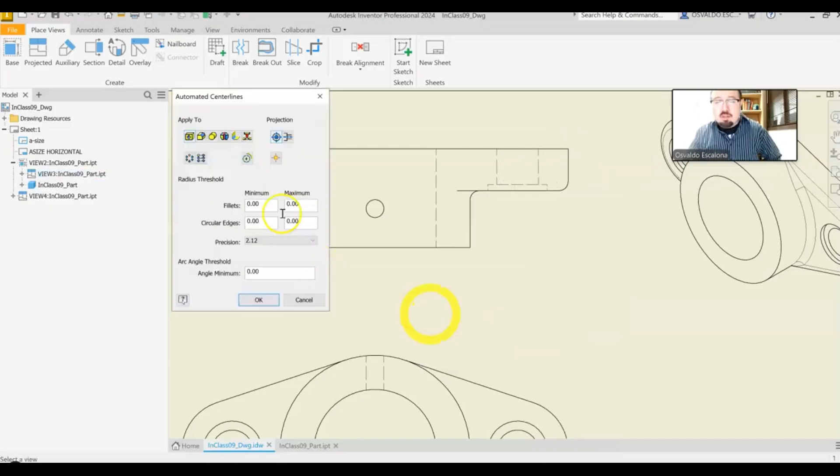So let's select both of them. And boom - okay, so it seems to me that I did not capture this one. So I'm going to go to the Annotate tab, and I'm going to click on the center marks.

And then I'm going to select that one, and boom. It's not the greatest, but it's better than nothing. All right, let's do another one.

I'm going to select the view, right click, and do automatic center lines. I'm going to click both of them, and say okay. Boom, that one's actually better.

Actually, the center mark should go to this guy. So I'm going to go back and actually put the center mark right there. Let's back on the drawing.

Okay, so you guys should be able to put these two dimensions. Again, just right click and dimension, but let's do it so it doesn't take that much for me to show. I'm going to right click, say from here, right click - make sure you escape if you want to terminate the command - so I'm going to say from here to there, boom. From here to there, boom. I'm going to hope that you guys can see my dimensions going backward for the part.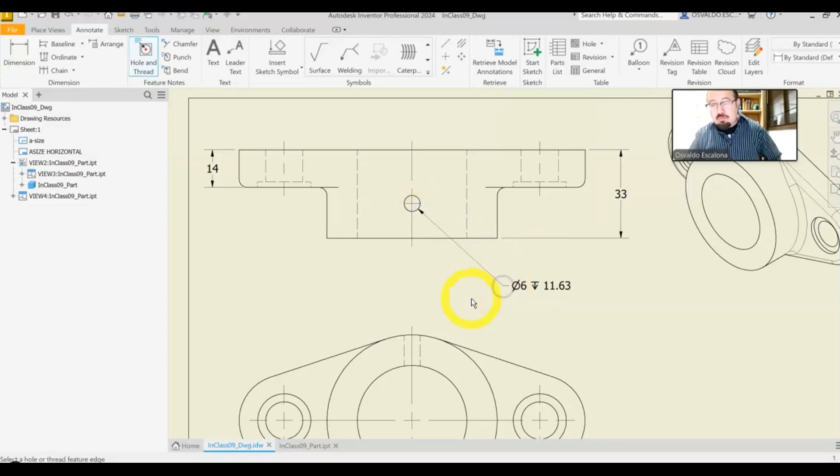The next thing I want to do is the hole callout. So I'm going to right click hole - that's the hole command. I'm going to point towards the hole, and then move away. You guys will notice it gives me my depth because it knows the thickness of my wall.

In my case, I don't want to give it its depth. I just want to tell it through one wall. So I highlight it, and tap on top of it. Through one wall. Boom. Go back.

Right, so which is this one, that one. And I need to give it the depth. Oh, I needed to do the location of the hole, guys. Let me get the location of the hole. Yeah, you gotta grab a ruler to make sure that you don't miss anything, right?

I'm gonna come over here. I'm going to click in there. I'm gonna move away about yay, right? Make sure it's not too close to the part. And we are done with this view.

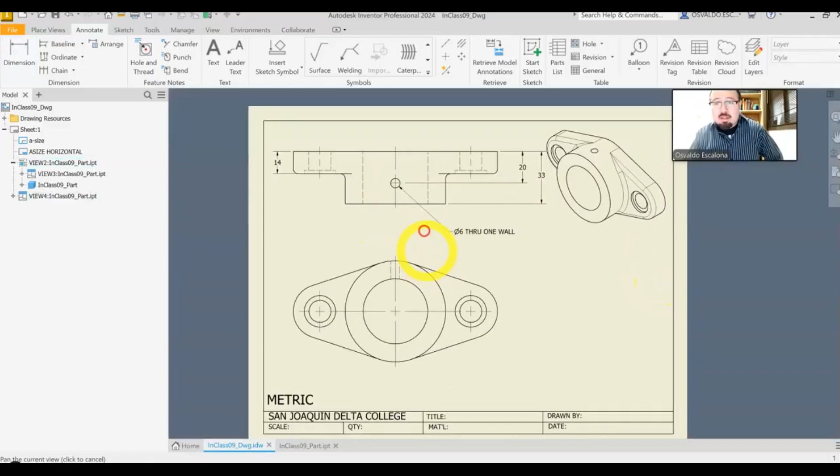You also can do the hole callout on the inside. I can do that hole. I can do that one. Let's do all of them from the center, right? Another hole right here. So that one, right?

That one's good. I need to take away the depth because this is a spot face - the depth is not supposed to have a 100 depth. I want to take away that depth, and boom.

And I actually have two of them, so probably I should put 2 times in there. So I'm gonna go to the front, 2 times. Boom. Enter. I also have a radius here, right?

So I'm gonna right click and do a radius. I'm gonna select the radius and come up. And I got 2 of them, left and right. So I'm also gonna call it 2 times. Go to the text, go there, to the left, 2 times, boom.

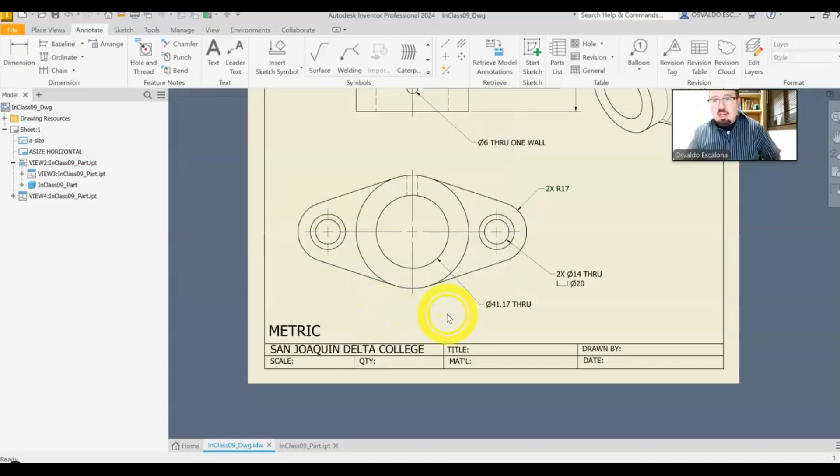How do I do the tolerance? If I want to do a tolerance, I double click on the hole command. I have a precision and tolerance over here. I can open that one up. Eventually it will open. There we go.

I click on the double arrow. I activate my tolerance, and I usually like to use a limit stack - that means you stack the tolerances. And then I gotta look at what tolerance I'm using. So it seems to me is 4117 and 4128, so that is 8 plus 3.

That's 13.13 different, right? Okay, so I'm gonna go on the up, I'm gonna put say 0.13, 2 decimal places, yep, 2 decimal places, and then I'm gonna say okay, and then I'm gonna say okay.

I think I went a little bit too high. Oh, it went too high, so that'll take away 2. So double click that one. Precision and tolerances - come on, precision and tolerances. And I'm gonna have this guy 11. Okay, let's try again. There we go.

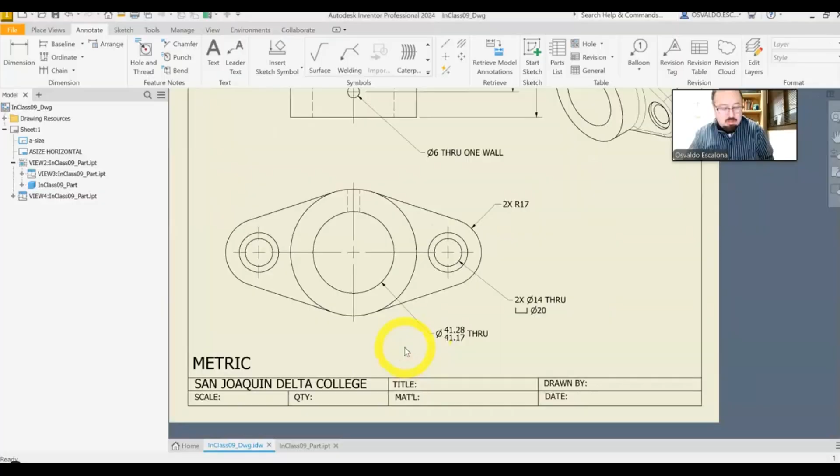All right, you guys should be able to do this radius. You can leave it the way I have it, or you can put it here. In fact, put it like where I put it. That way, you can argue I did exactly like you did it. You should give me 100%.

The one on the left side, you also gotta put these notes. So let me see if I can grab it from here. I'm gonna select text, select these ones, copy them, and then put them over here. So I'm gonna go to the text, make a bigger box till it brings this one, and then in my case I'm just gonna paste it. In your case, you might just type it.

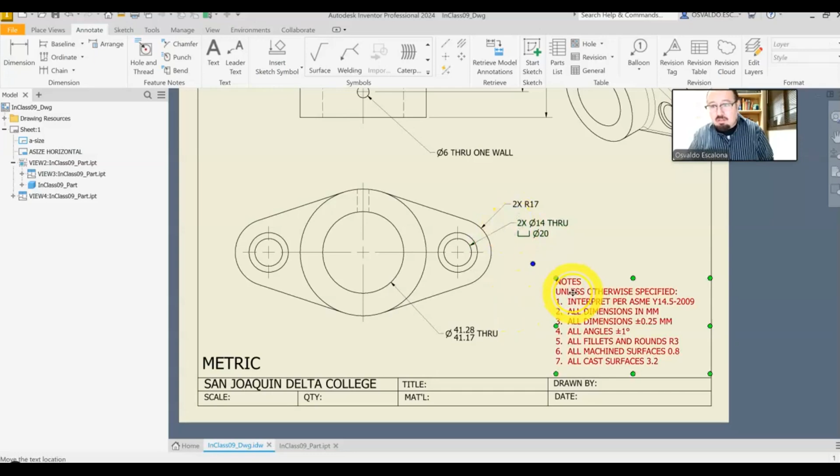All right, so I'm gonna say okay. You guys notice things are colliding. At this point in time, you're gonna start moving things. Maybe move it here to get out of the way of the text.

The only thing that I need from here is, if you guys want to put any of the symbols like plus and minus or degrees or whatever, you have the symbols here. You just select them and they will copy on the bottom. That's for plus and minus and degree symbols. In my case, I need a surface finish symbol.

I also most likely want to underline the notes. So I'm gonna go up, grab the notes, and underline them. I'm going to say OK.

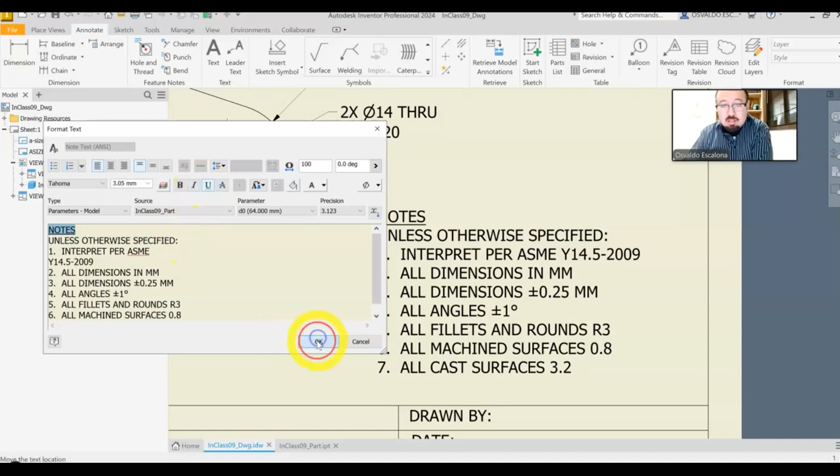And then eventually I'm going to put my surface finish. I'm going to double click super quick, double click, and then I am going to say OK, and then double click again super quick.

Now the problem you guys will notice is that it has a number. Make sure you edit it to remove the number, otherwise it's not going to look like mine. Let me double click on that one to bring up this, and then I can take away the number.

Beautiful. All right, the rest of it you should be able to finish. You should put your name, spring 2025, the material, the title, the quantity. Make sure you have all of the dimensions that I did not do.

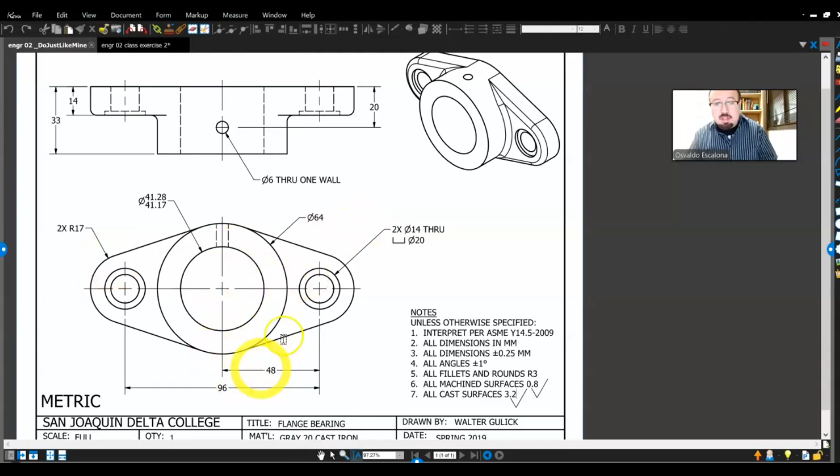At this point in time, it's time for you to submit this, right? So I'm going to save this. Once you're done, you're going to save it. Actually, you probably should save as you go.

I'm going to go and export this to a PDF. So File, Export, PDF. You can also print, but the easiest way to get the setup is doing an export. And since I renamed it correctly, it already has the PDF name that I want to give it, so we'll create a PDF.

If you guys were to look here at homework number 9, in class number 9 now has a PDF that, if I were to open it, will be ready for submittal. When you submit to me, it needs to be a PDF. In fact, you need to submit 3 files.

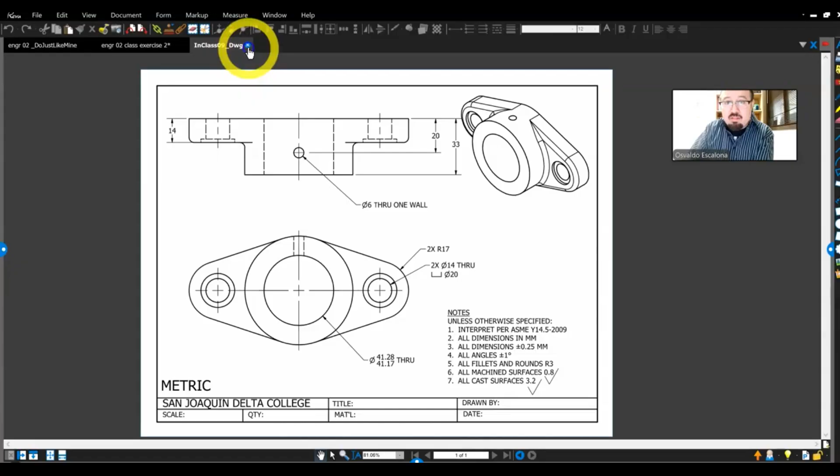What do I need the 3 files for? I need this one and this one, so that I ensure that you did it. And please do not copy, because I will give you a 0 the second time I expose you in my class. You've got to do your own work.

How do I ensure that you do it? There is iProperties within these files that tells me when it was created and who created it. That's how I find out really quick who cheats through those files. And I need this one because I need to mark it, with my pen, with my tablet.

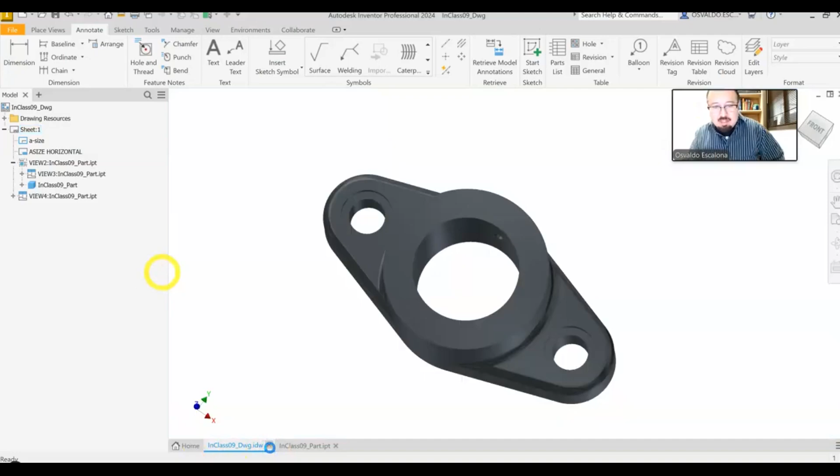All right, let's take a look at your next homework. This one is the extra credit, by the way, not your regular homework. Your real homework is, let's take a look at it.

Let's go find it, I don't want that one anymore. Let's go find your real homework. I believe I should have it somewhere in your Dropbox. Let's see, I'm gonna go here and look for your homework. I'm not gonna do it, we're gonna discuss it. Hopefully it makes sense how you should approach this.

I'm gonna go to your class number 9, engineering 2, go to the share folders, homeworks, and you guys are probably on homework 9 right now. Let me try it here, number 9, and let's open those two so we can see how they look. Right click, open.

Okay, let's see, how would you do this? Let me give you some insights. You guys are gonna do your own by yourself, right? But I'm gonna give you some insights so you have a good idea of how you should tackle it. This is also good practice for you to start developing, so you can do well on your midterm.

Let me get something so it focuses on the camera. Can I see like that's better? All right, so the first thing that I would do, move this guy slightly to the left so we can have that. The thing that I would do, most likely, is create a sketch on this plane. I will just make it a rectangle, by the way.

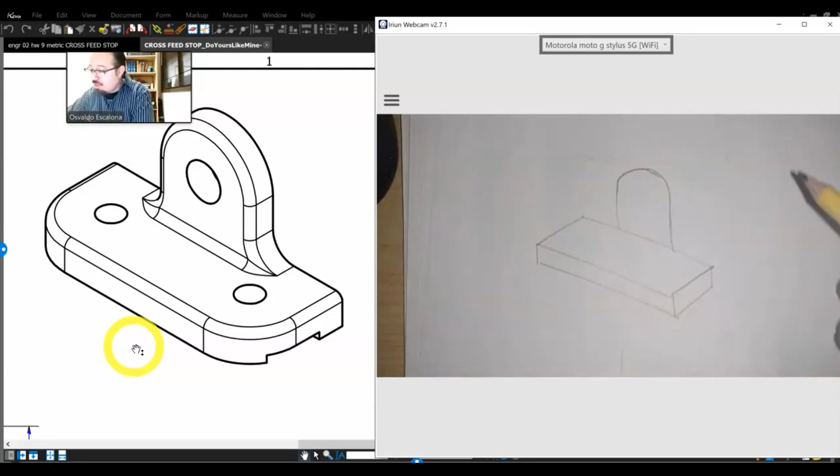What I'd most likely do is just do this shape, like this, somewhere in the middle. I don't want to put any fillet shape, I'll just put the shape—in fact, I don't want to put any holes. Then after I'm done with the sketch, make sure it's completely closed, otherwise it will not work.

Then I'll extrude it to give it a depth, and that thing will look something like this. Boom. Let me erase it so you guys can see how it will look after you extrude.

At this point I can go and give it a fillet. I'll go through this edge, activate the fillet command, and give it the radius it needs to be, and it will look like this. On the other side, I'll click on that edge, activate the fillet command, and eventually it will look like this. Then you have a part that's pretty much something similar to this.

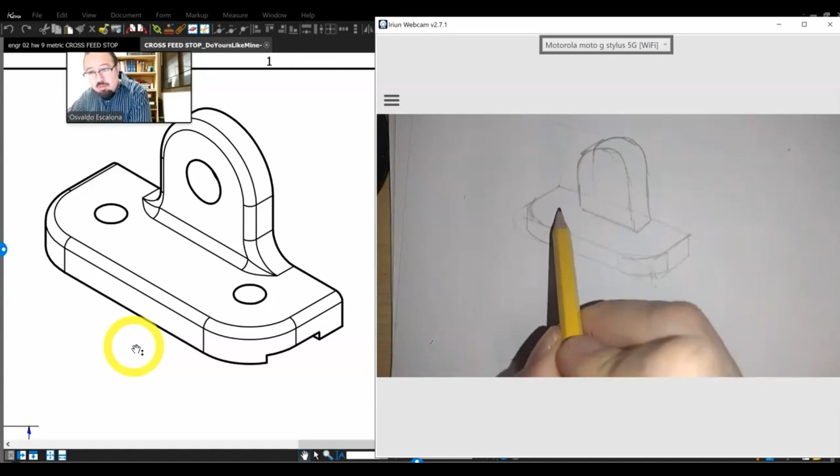Right after that, I'll start doing the holes using the hole command. I'll put a hole right there, select the edge to give me a distance, select the edge to give me another distance, and do one hole. Since the other hole is symmetrical, I'll use the mirror command, which is the one I showed you today. If you did it correctly, there should be a plane you can use to mirror that hole to the other side, and it will look like this.

I'll also make another hole right here using the hole command, select the face, then select the edge to center it, give it the right size, and eventually it will look like this.

At this point there's one more fillet to go—actually a couple more fillets to go. The first one I'll do is this one to give it a nice round, which will make it look like this. Hopefully you guys see it look like that. Then I'll do the rest of the fillets: select this one, then select the other one, select the face, the edge, give it the right fillet, and you're done with your part.

Now I have a notch on the bottom, so at this point I'll go to the right side view, create a sketch, and extrude it all the way through. This notch goes all the way through, and eventually your part will be finished.

Something like that. Again, this kind of thinking is something you should get yourself used to, and how do you get used to it? By looking at it before you start—see, okay, how am I going to do it. At this point, you can do your own.